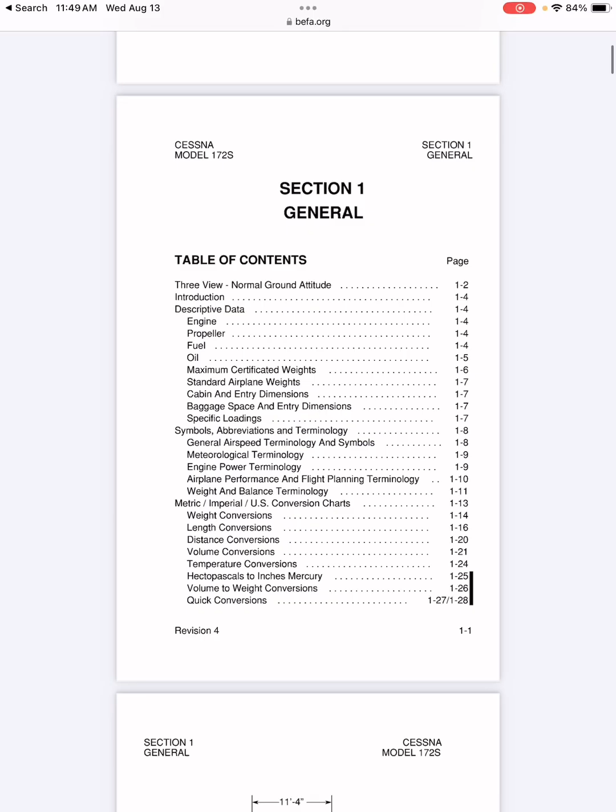All right, so what I have here is the Pilot Information Manual for the Skyhawk 172SP, or the model 172S. This is going to be a generic pilot operating handbook. It is a pilot information manual, so it is not specific to our aircraft. How do we know it's not specific to our aircraft? It does not have our tail number anywhere here. When we're flying around with the pilot operating handbook, we have to make sure that our tail number is specific to that handbook itself, and we don't just have this generic pilot information manual.

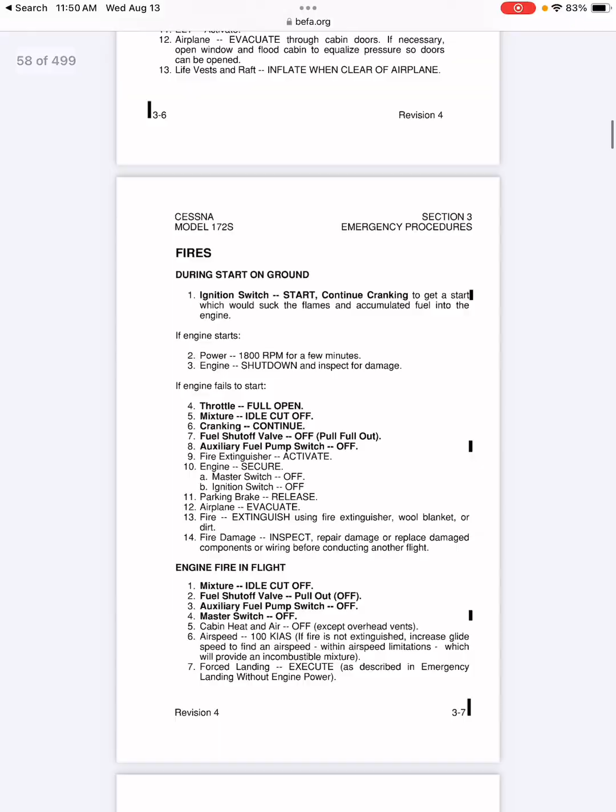So we just finished up on performance and what is pressure altitude, what is density altitude, and how that affects your performance. This is all in reference to Chapter 5 of this pilot information manual. So I'll go ahead, we'll go down through here, just shooting through the limitations, emergency procedures, checklists.

This is just the lifeblood of the 172S. But again, it has to be specific to your aircraft, so make sure that you're flying around with the actual pilot operating handbook, not this generic one.

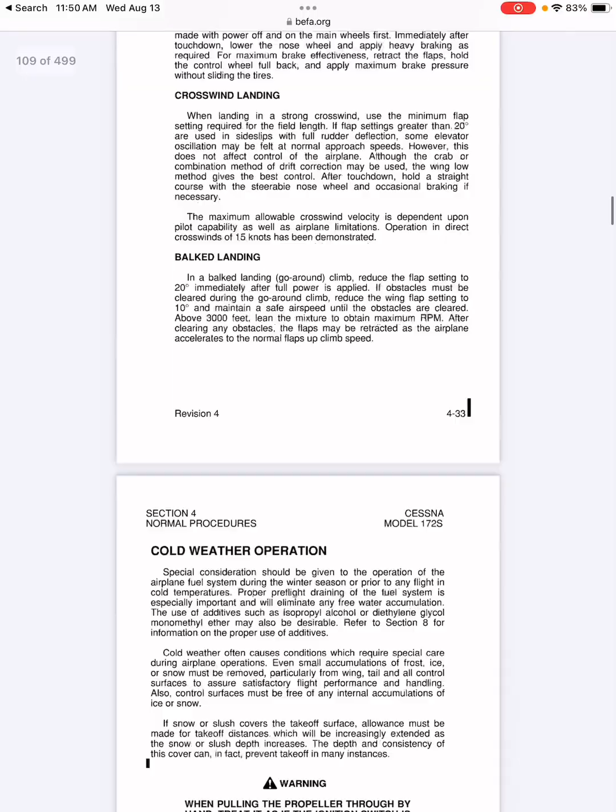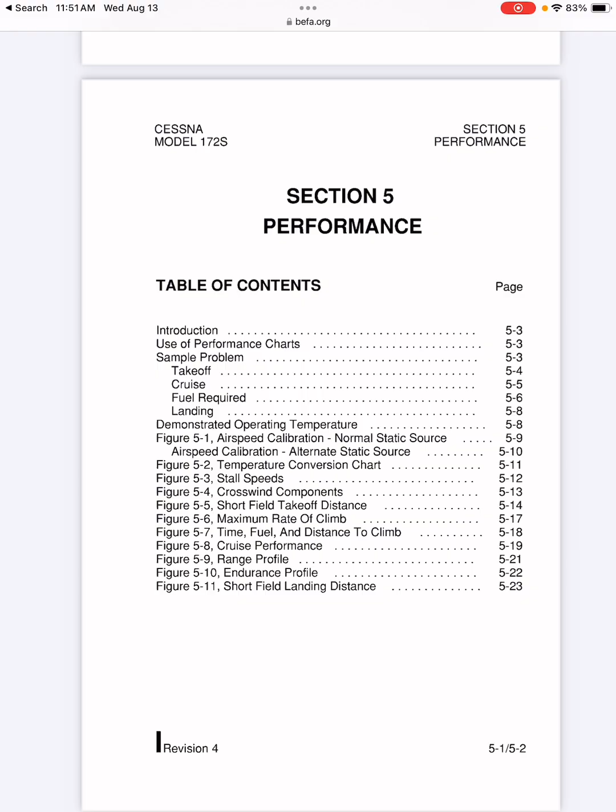So Section 5, performance. We're going to have an introduction, the use of performance charts, and they'll give us sample problems. When we come down here, we'll talk about airspeed, the difference between indicated airspeed and calibrated airspeed, how using the alternate static source affects that, and all that stuff. Then we're going to go into stall speeds and different configurations, crosswind components. But the main thing we want to talk about here is the short field takeoff distance, maximum rate of climb, time, fuel, and distance to climb, cruise performance, range profile, endurance profile, and short field landing distance.

So this is basically like a simulated flight. To start the flight, we have to go ahead and take off. We're going to use a short field takeoff technique per the pilot information manual, which is going to be a different V speed, or a different speed we actually rotate out and climb out at. It's just kind of a max performance takeoff.

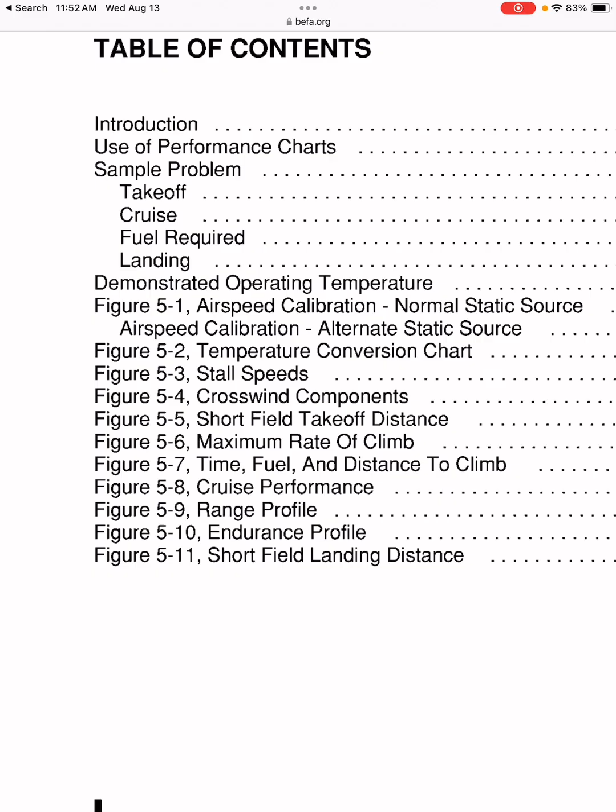And then we're going to have to climb. What kind of climb speed are we actually going to get, or climb performance, based on different pressure or different temperature for a given day? What is going to be our time, fuel, and distance to climb? What's going to be our cruise performance? How fast are we going to go? Our range profile, what kind of fuel we're going to burn, all that stuff. And then the ground roll, short field landing distance. After we clear that 50-foot obstacle, how much runway are we actually going to chew up?

So go ahead and go down. We'll just pass the introduction and the performance chart, or the sample problems and whatnot. We'll start at airspeed calibration.

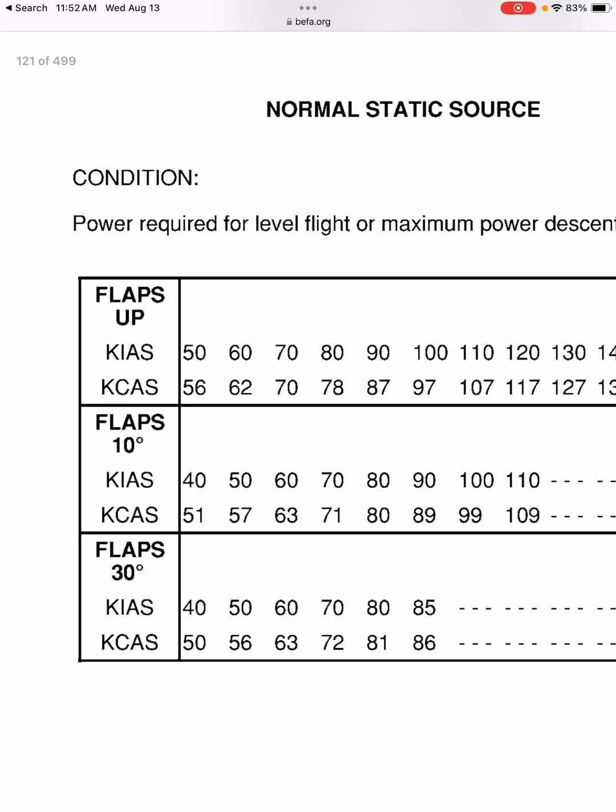This is what I was talking about when we were going over airspeeds just a second ago. So we'll have an indicated airspeed. We have a flaps up setting. Indicated airspeed is going to be 50 knots, but because of instrument error, position error with that pitot tube, it's actually going to be 56 knots. So kind of a little bit of a nice buffer for you. As we go up in airspeed, though, it kind of trades out. At 90 knots, we're actually flying 87. But at these slow airspeeds, it actually gives you a little bit of a buffer.

If we go to flaps 10, if we're at 40 knots, that is our VSO, our stall speed in a landing configuration, we're actually flying 51 knots. So just some things we got to be aware of.

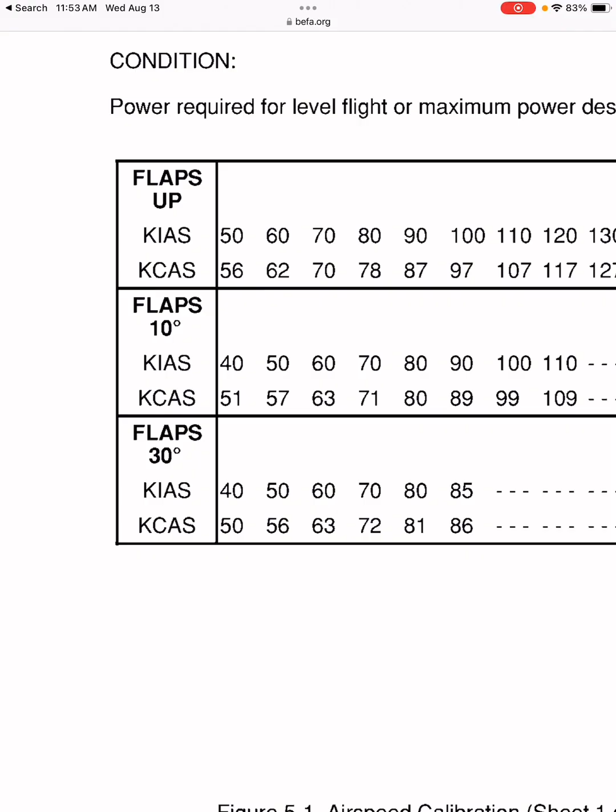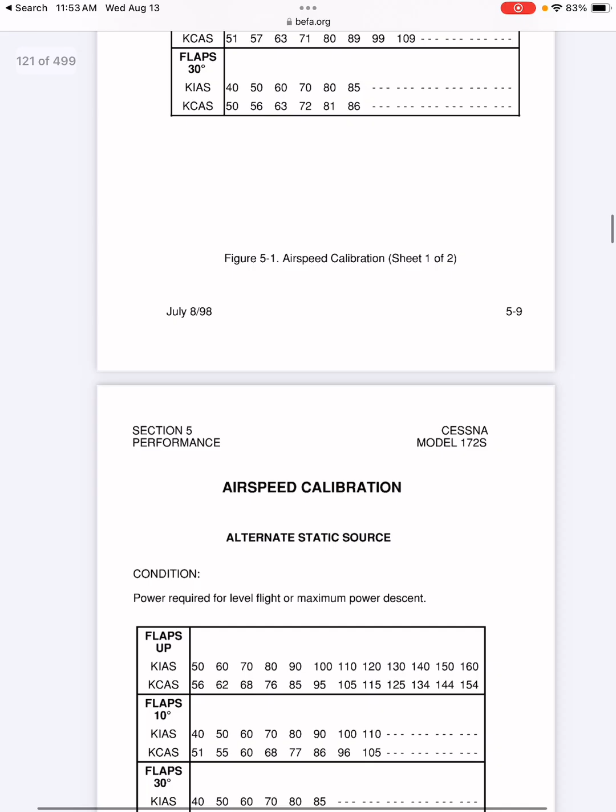This is going to be the conversion chart, and we'll use that when we're doing navigational flight planning. We'll go from indicated airspeed to calibrated airspeed. Just some alternate static source, temperature conversion chart if you ever want to go from Fahrenheit to Celsius.

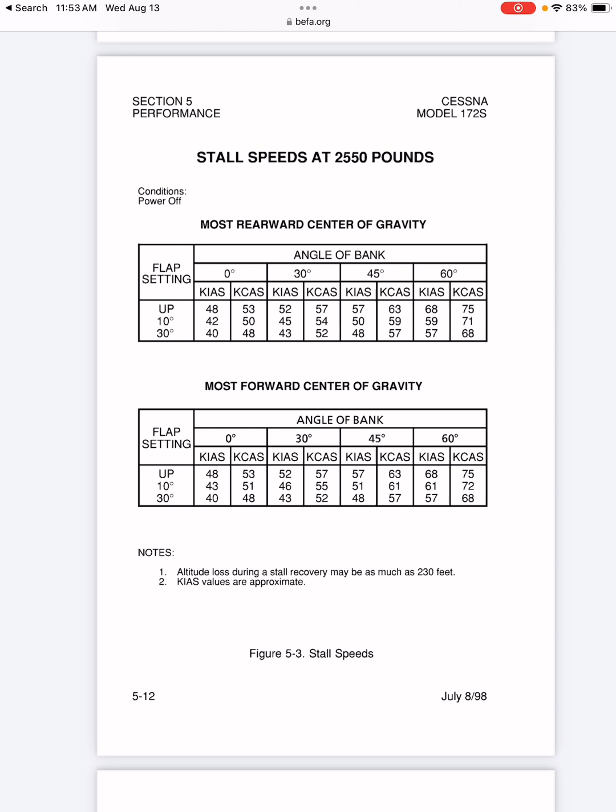Stall speeds with different centers of gravity. We'll go over that when we jump into weight and balance. How we distribute weight inside of the aircraft is going to affect our stall speed and performance characteristics as well.

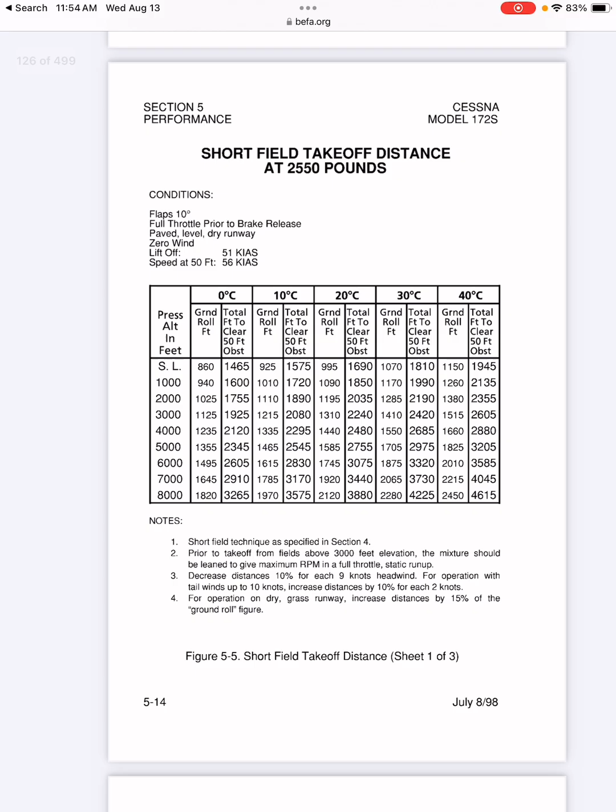Now we have the short field takeoff distance at 2,550 pounds, which is the max gross weight for the aircraft. Now we have a few different charts for our takeoff, where we're starting our flight. This takeoff here, we have a short field takeoff distance at 2,400 pounds, and we have a short field takeoff distance at 2,200 pounds. Obviously, being at max gross weight, we're going to chew up more runway.

So this is the chart for us to use if we want to be conservative, because these charts were made with a test pilot and a brand new aircraft. We have to understand that our aircraft coming from the 90s has got some wear on it. It doesn't perform like it first did right out of the factory, and we're also not professional pilots, so we kind of have to put a buffer in there. So we'll use the short field takeoff distance at 2,550. We'll be chewing up more runway, and it's just kind of a conservative factor.

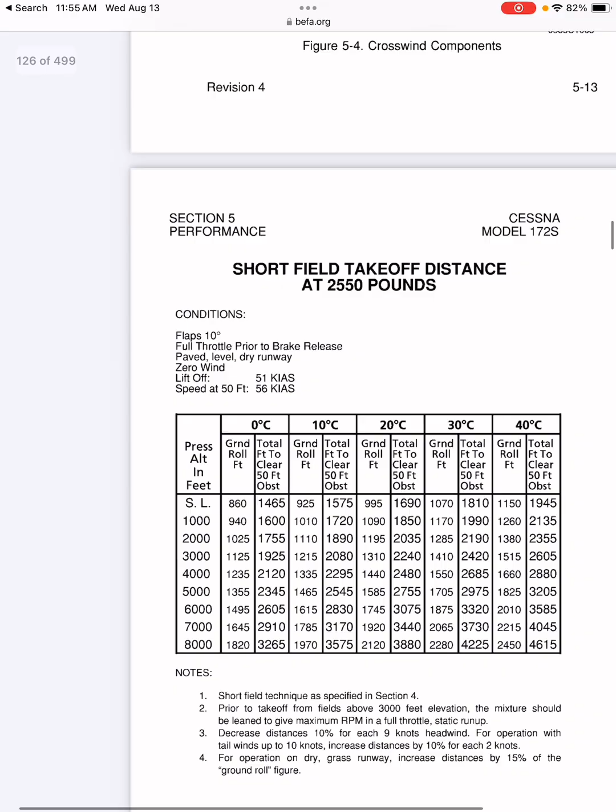Whenever we're using these charts, we want to be extra conservative, just because it's not a brand new aircraft anymore, and we're not a professional pilot. That's where these numbers were derived from. So whenever we're using these charts here, we have to go over two things first: the conditions, which is going to be on the top up here, and then we have to go over the notes. Those are the first two things we're going to go ahead and read before we actually use these figures.

So conditions: flaps 10 degrees. That's going to be standard for a short field takeoff. Full throttle prior to brake release, so us using the most amount of runway at 10 degrees flaps, applying the brakes, going full throttle, verifying our engine instruments are in the green, and verifying that the airspeed is actually staying at 0. And this is a paved level dry runway.

If we're using a grass strip or a dirt strip, obviously these numbers would be increased. This is in 0 wind, so if we had a headwind, these numbers would be decreased a little bit, because a headwind allows us to take off in a certain amount of ground roll, and a tailwind would do the vice versa of that, so it would decrease our performance, and we chew up more runway before we actually got to a good liftoff speed.

Liftoff speed is going to be 51 knots, so a little bit lower than our regular VR, our rotation speed. And then speed at 50 feet, or climb out speed, is going to be 56 knots until we climb that obstacle. One thing that people don't really understand is these liftoff speeds and these climb out speeds are going to change with weight.

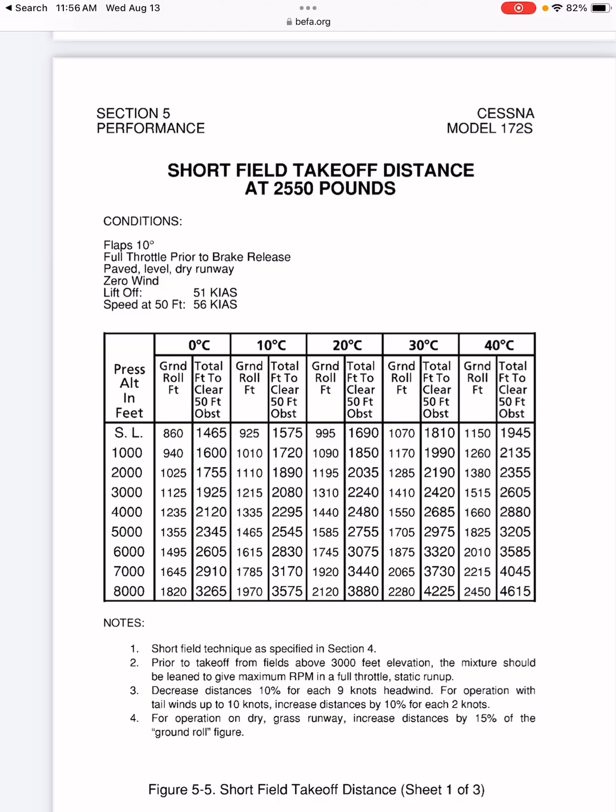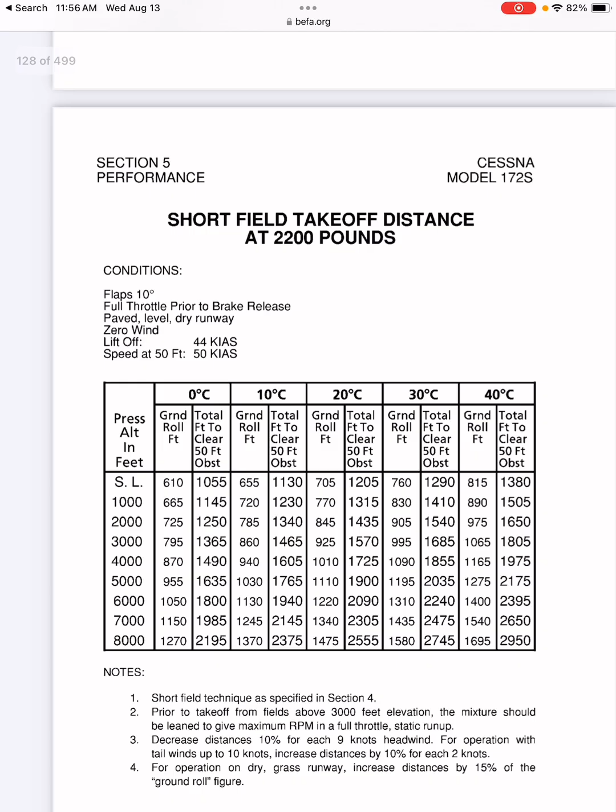So if we go down to 2,400 pounds, we have a liftoff speed of 48 and a climb out speed of 54. And then we have at 2,200 pounds, a liftoff speed of 44 and a climb out of 50. So it kind of changes with weight. But if we want to be extra conservative, we're going to use the 2550, which is pretty standard. But just know, for your check ride sake, that it does actually change with weight. So liftoff 51, climb out 56.

Now let's read those notes, because like a good pilot, we read the conditions first, then we go to the notes. Short field techniques as specified in section 4, so just standard short field takeoff techniques. Prior to takeoff from fields above 3,000 feet elevation, the mixture should be lean to give maximum RPM, so above 3,000, we're going to lean it out for best RPM.

Decrease distances 10% for each 9 knots of headwind. For operations with tailwinds up to 10 knots, increase distances by 10% for each 2 knots. So we have to go ahead and change the numbers that we get for each 9 knots of headwind, 10%. So we have to decrease it. Like we said, it's going to decrease our ground roll if we had that headwind. It's letting us know that.

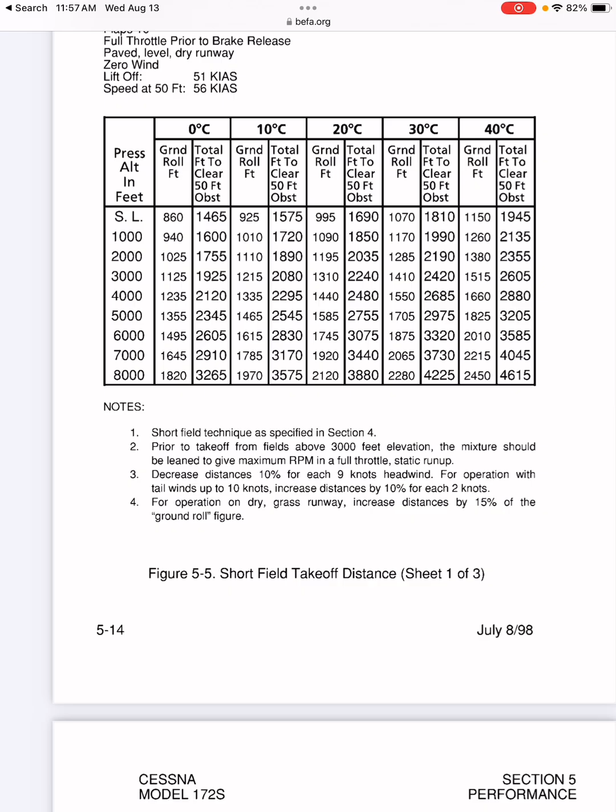And then for operations with tailwinds up to 10 knots, increase those distances by 10% for each 2 knots. So if you had a 4-knot tailwind, you'd have to increase these numbers by 20%, which is going to be quite a bit. And then for operations on dry grass runways, increase distances by 15% of the ground roll figure, which is huge. So of a dirt or grass runway, we know the conditions for this is a paved level dry runway. We have to go ahead and increase it by 15%. So the ground roll is going to be pretty big.

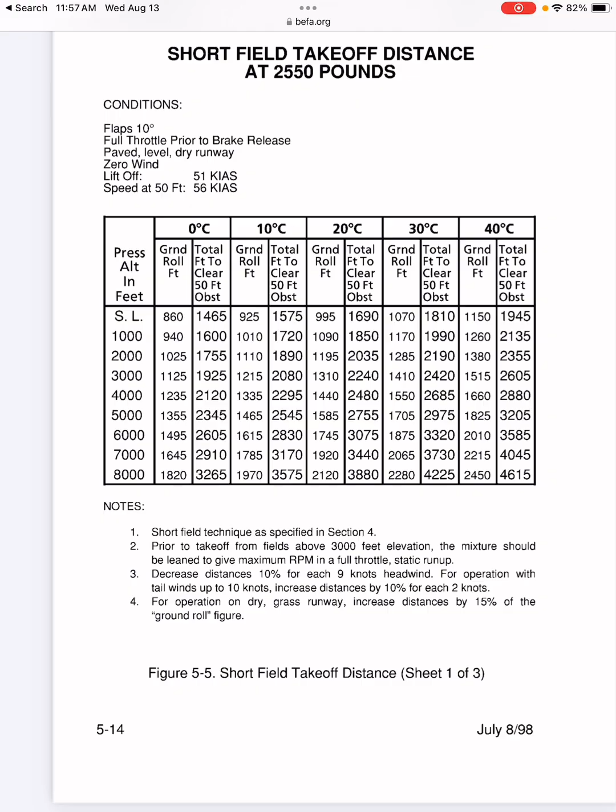Cool. Now we can go ahead and jump into the chart itself. Like I said, when we were calculating that pressure altitude, we were doing that for a reason. We have sea level here. We have 1,000 feet. We have 2,000 feet. The last calculation that we did for a pressure altitude, with the altimeter setting being 30.02, was 900 feet. But if we want to be conservative, let's just round up a little bit, and we'll call it 1,000 feet.

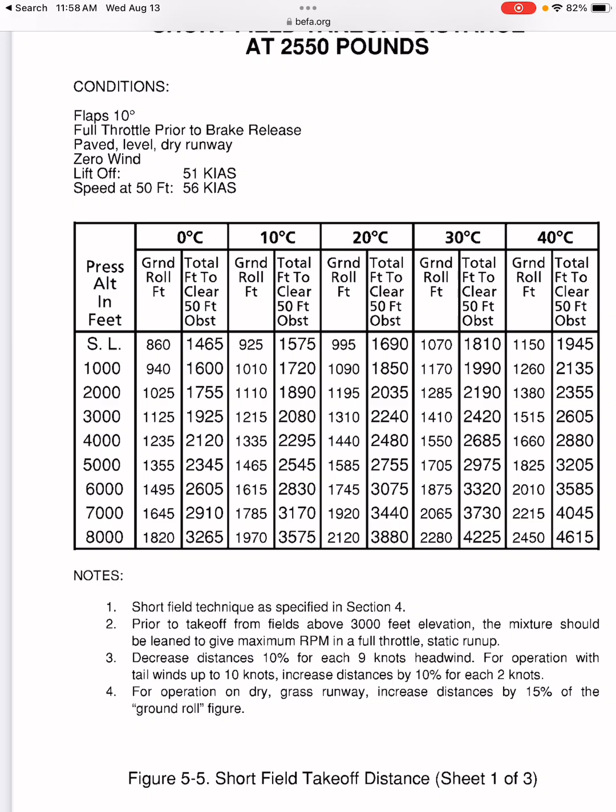Now, temperature. We said that Phoenix was going to be 105 degrees Fahrenheit for the day, which is going to be this 40 degrees Celsius column all the way out this other side. So we're correcting for pressure in this left column, and in the top row, we're correcting for temperature. So pressure on the left column and temperature on the top column. And we're just going to kind of line them up.

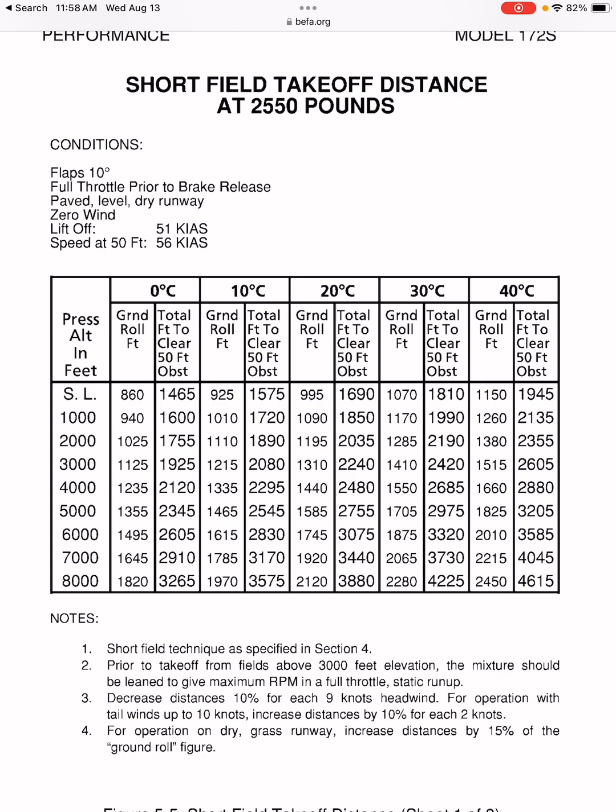So at 1,000 feet, we have two figures here: ground roll, which is the actual runway we're going to chew up, and total feet to clear a 50-foot obstacle. This is the horizontal distance it takes for us to climb up at 56 knots.

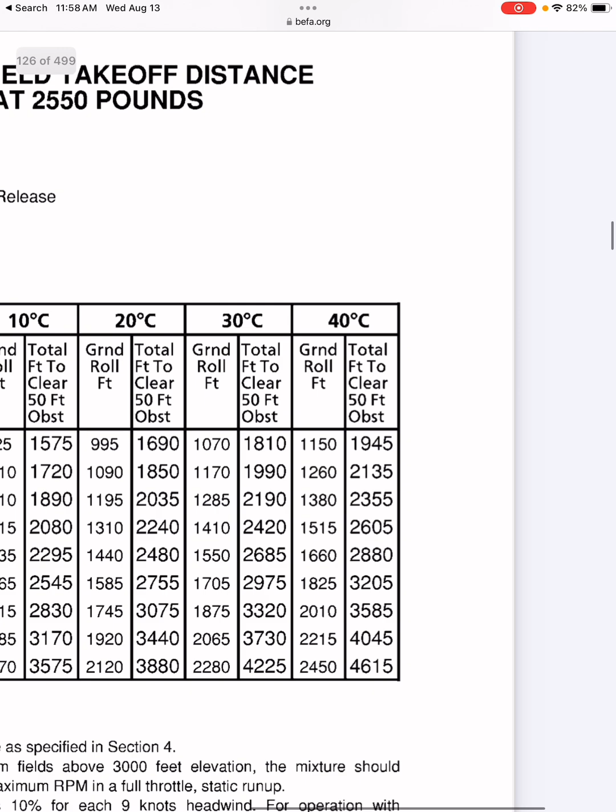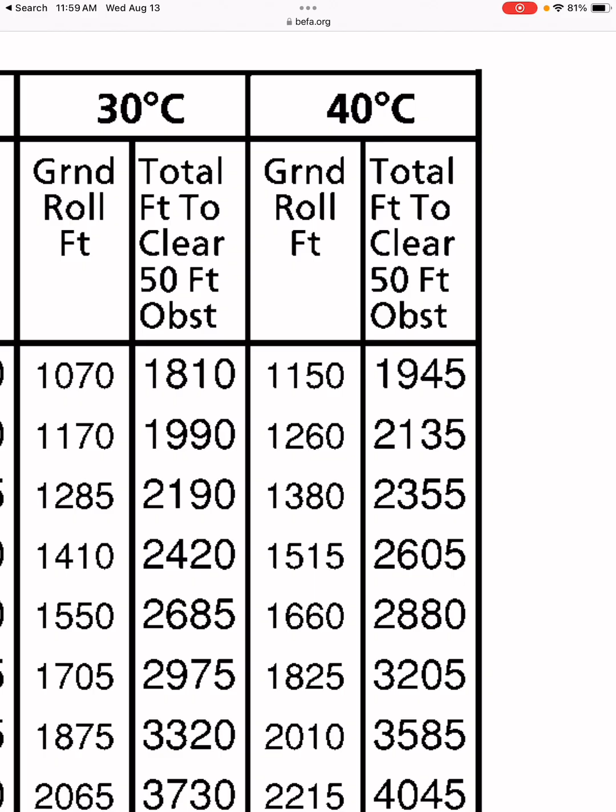But we have to go to the 40 degrees Celsius column, so we'll go all the way over here. Now we can calculate, just making sure we're using the right one. At 1,000-foot pressure altitude and 40 degrees Celsius, we're going to have a ground roll of 1,260 feet. And to clear that 50-foot obstacle, we'll need a horizontal distance of 2,135 feet. That's basically how we use the short field takeoff performance charts.

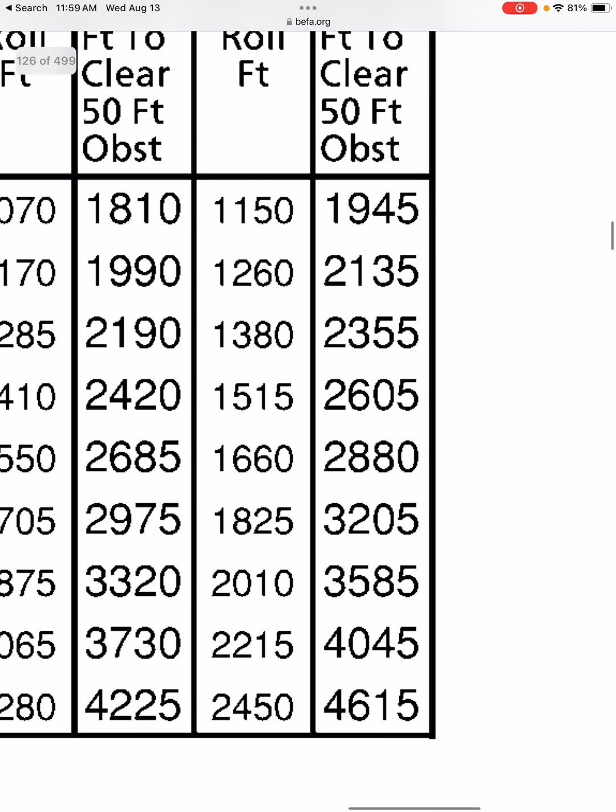As our pressure altitude goes up, say if we were taking off at an airport at 8,000 feet, like Flagstaff which I believe is pretty high up there, and we went all the way to the hottest day it could be, we're going to use pretty much double. So 2,450 feet is going to be our ground roll to get to that rotation speed.

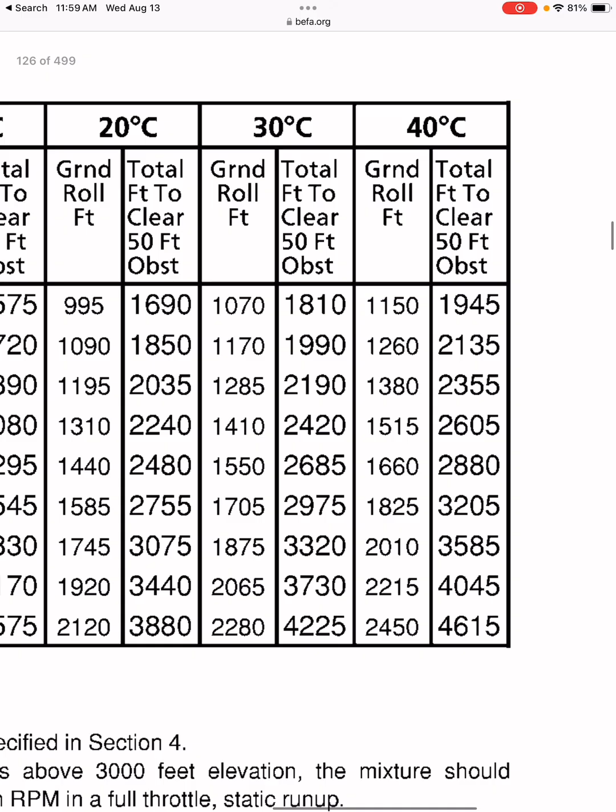And to clear that 50-foot obstacle, we're going to need 4,600 feet. So if we have a tree 4,000 feet down the runway that's 50 feet tall, we're probably not going to make it. This is why it's so important to understand your runway length of intended use, because this is going to save your life. It really is. So this is takeoff using a short field takeoff technique.

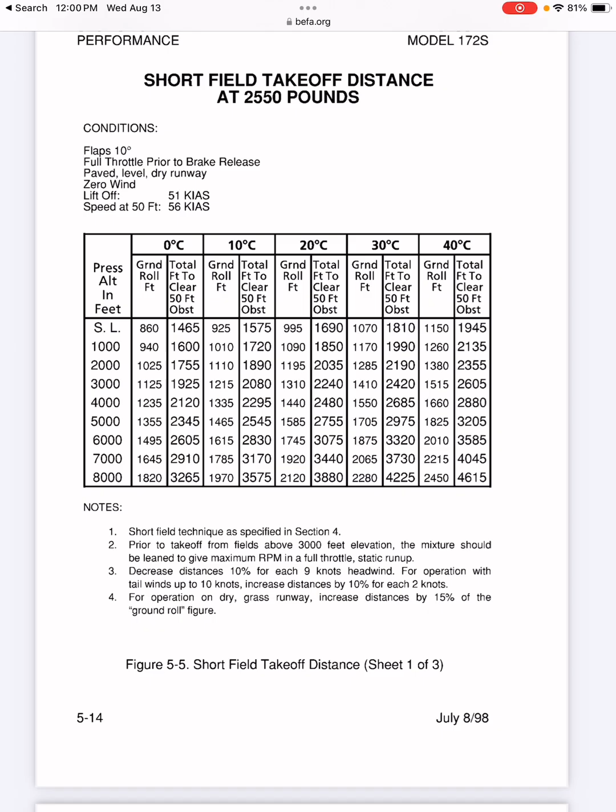And then we have the different weights as well. Like I said, be conservative. This was done by a test pilot in a brand new aircraft, so use the highest gross weights, round up your numbers. If it's warmer, or if that pressure altitude's a little higher, use that higher number to give yourself a safety buffer, because this is no longer a new aircraft.

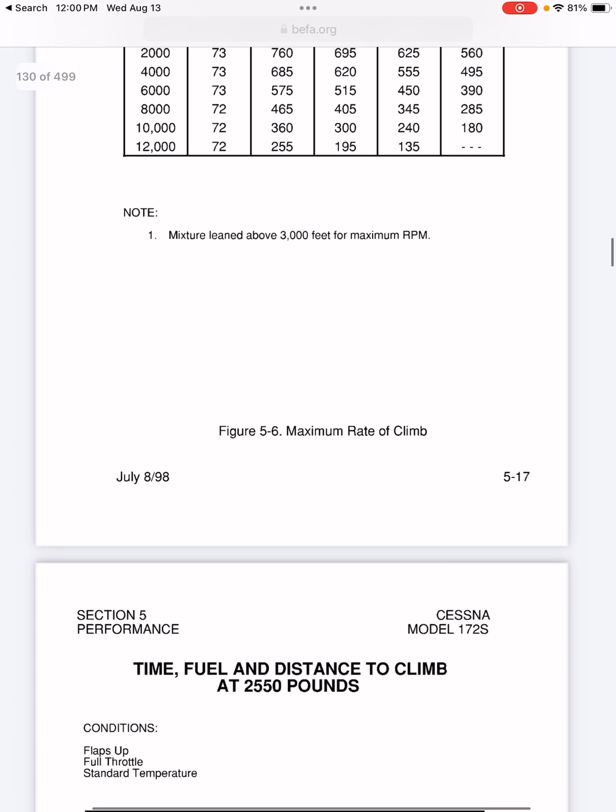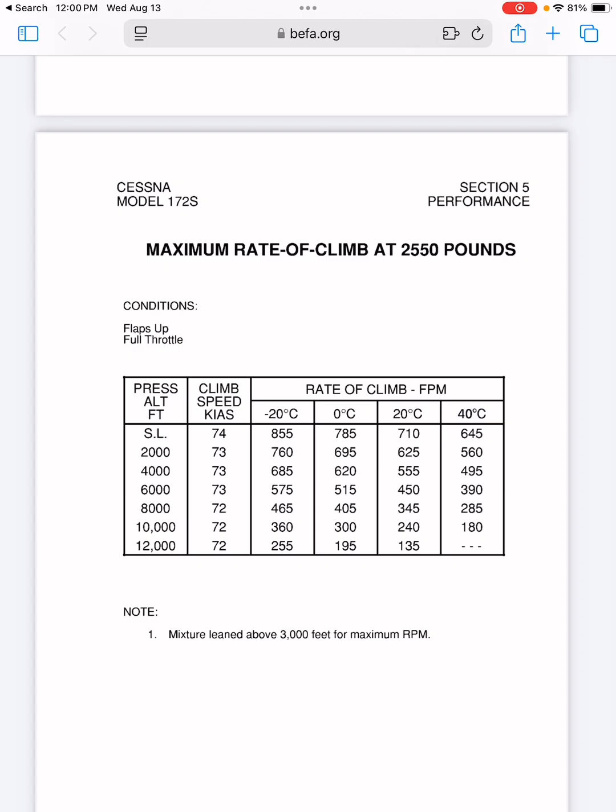Now we have to climb. This is going to be maximum rate of climb at 2,550, max gross weight. They don't have another one that varies with the weight we actually are—it's just max gross weight 2,550. Conditions: flaps up and full throttle. If we were using that short field takeoff technique, we would not be getting this climb performance because we were flaps 10. This is also full throttle, so we've got to be at full throttle to get these actual figures.

Notes: mixture leaned above 3,000 feet for maximum RPM. We'll talk about correct leaning procedures when we're actually flying around. It's laid out kind of like the short field landing technique was: pressure altitude is the left column, and on the top column we're correcting for temperature. We know density altitude is pressure altitude corrected for temperature, and these are the figures we get.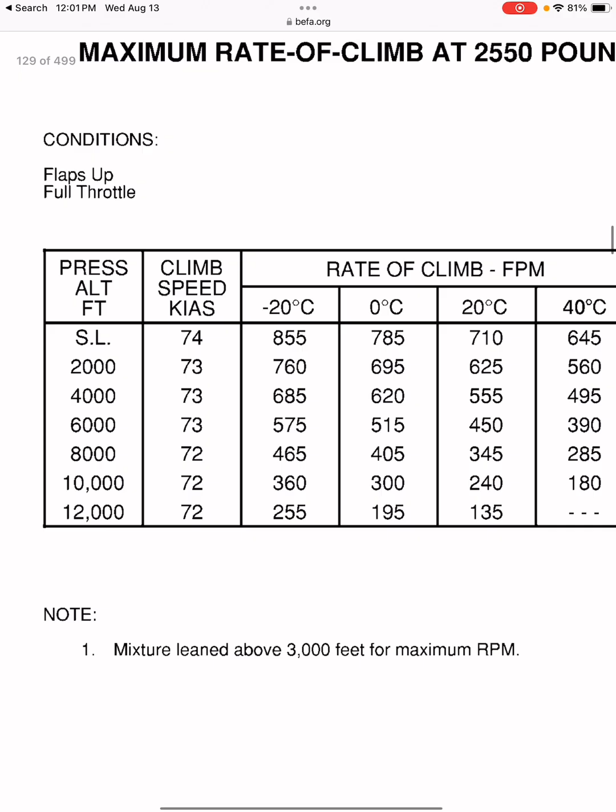So let's say we're taking off at a pressure altitude of 1,000 feet like we were—you notice we don't have that figure, so we have to interpolate to get the actual number. If we go from sea level to 2,000 feet at the temperature of 40 degrees Celsius, we have 560 and 645. At sea level, climbing out at 74 knots, we get 645 feet per minute on the VSI, and at 2,000 feet it'd be 560 feet per minute. We have to find the average since we're actually taking off at a pressure altitude of 1,000, so 645 plus 560 will put us around 600 feet per minute.

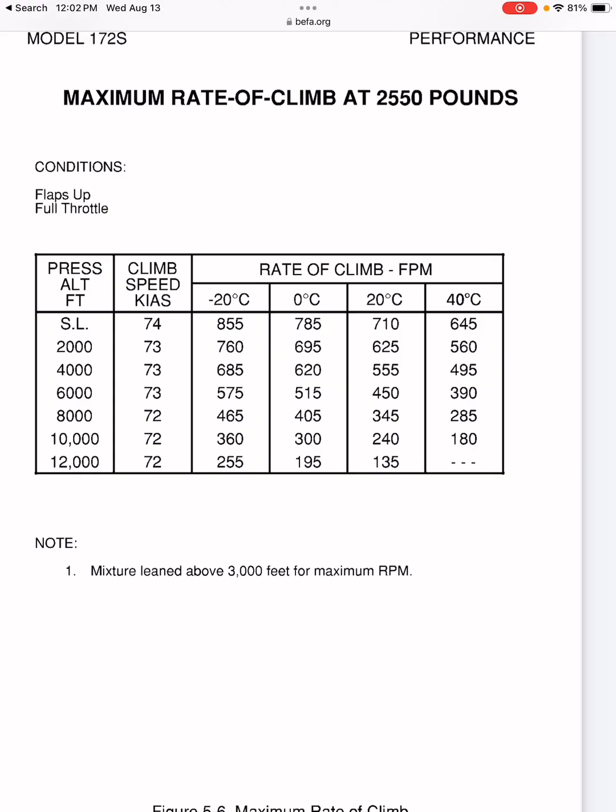As we climb up through 4,000, 6,000, 8,000 feet, we see it starts to drop because there's less dense air—less air for engine thrust or power, less air for propeller thrust, and less lift over the wings. You can see at 4,000 feet, at 40 degrees Celsius, it's 495, then it drops to 390, 285, 180, until we get to a service ceiling where we actually can't climb anymore. Good note there. Next one: time, fuel, and distance to climb.

How much fuel we're actually going to use, how much time it's going to take us to get to our desired altitude, and how much distance we're going to chew up. This will be very important when we go into navigational flight planning, when we're going over a nav log or top of climb. We need to know how far that top of climb in horizontal distance is actually going to take us, and this is the chart we can use for that.

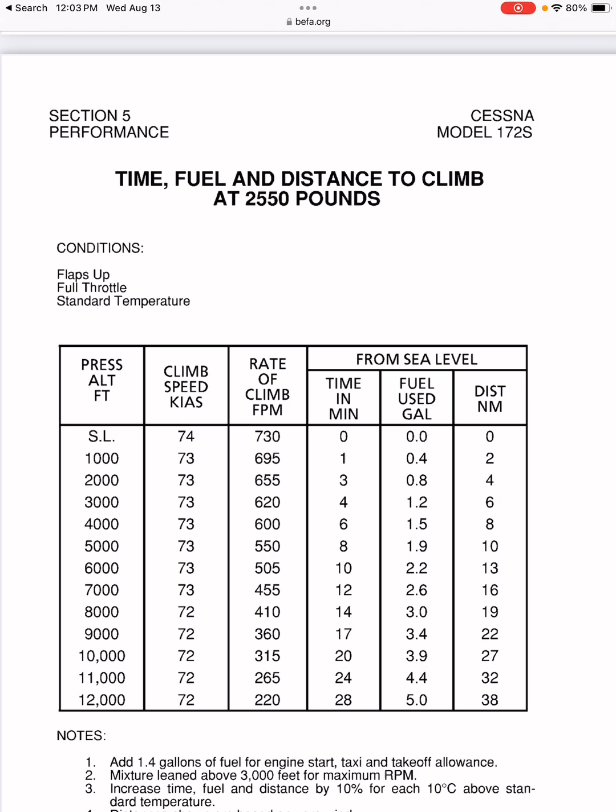So we'll start at the pressure altitude here, 1,000 feet, and then a climb speed of 73. Rate of climb is going to be... I committed—

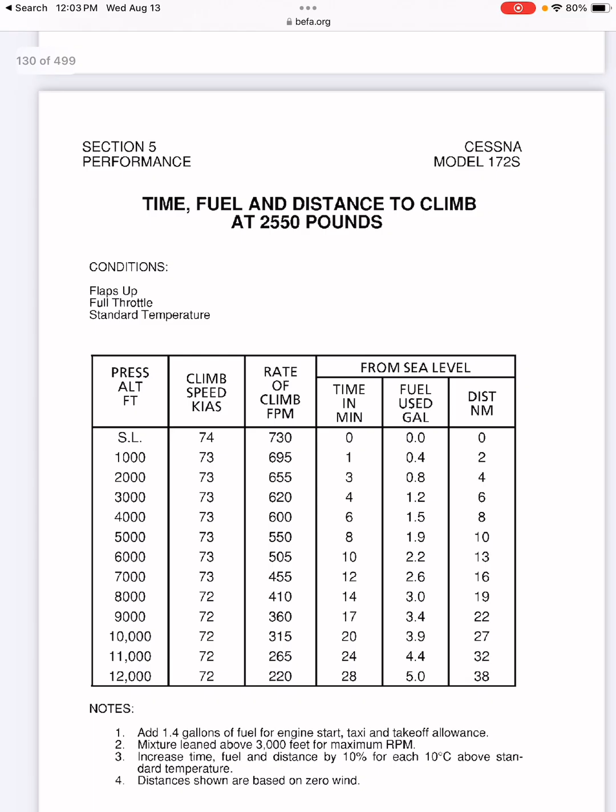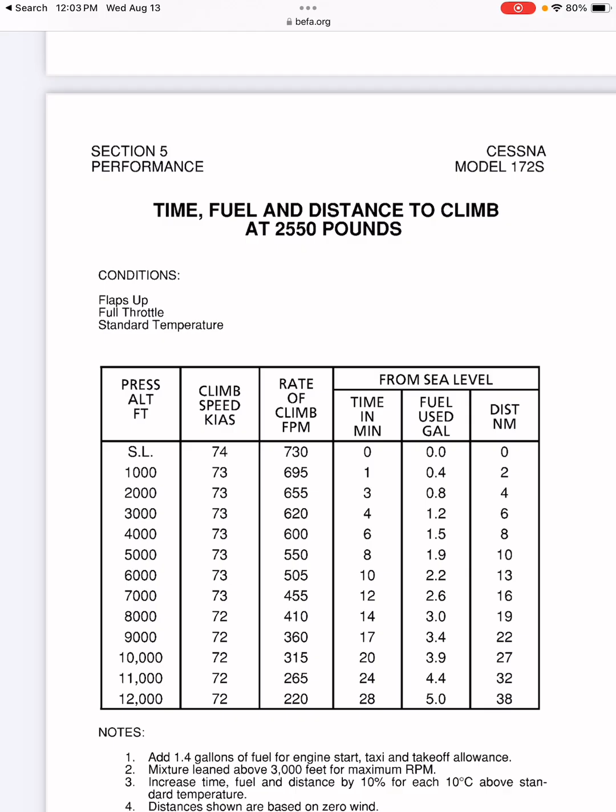I forgot to read the conditions first. So conditions: flaps up, full throttle, and standard temperature. That's why if I just use that chart, this is a great example of using the charts incorrectly—I just started reading it.

We have to know that these figures are in standard temperature conditions. So if we go to the notes, it's probably going to have some information on that: add 1.4 gallons of fuel for engine start, taxi, and takeoff allowance. Mixture leaned above 3,000 for maximum RPM. Increase time, fuel, and distance by 10% for each 10 degrees Celsius above standard temperature.

So when we were taking off in 40 degrees Celsius at that pressure altitude of 1,000, and we know standard temperature for that was actually 13 degrees Celsius, each 10 degrees Celsius above standard is almost going to be 30 degrees above. So we'd have to increase these numbers—time, fuel, and distance—by 30%, because we're almost 30 degrees above standard temperature. So just be aware of that.

Distances are shown based on zero wind as well, so if we had a headwind, it would decrease that distance. Obviously, if we had a tailwind, it would push us out further. Also, with a headwind we get a better climb rate and whatnot. But yeah, so we read the conditions, we read the notes.

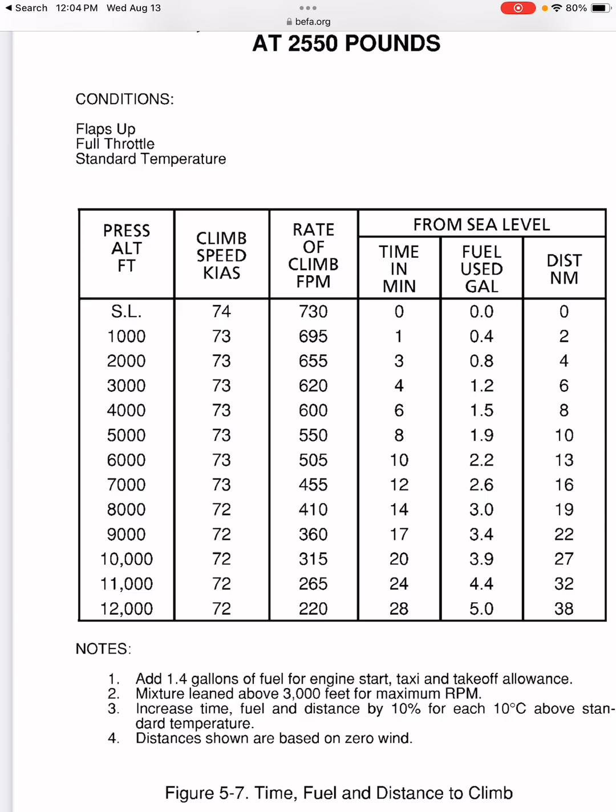Now we can go ahead and jump into this. So pressure altitude of 1,000 feet, we'll start with that left column there, climbing out at 73. Rate of climb is going to be 695 feet per minute. Time is going to be 1 minute. Fuel use 0.4, distance 2 nautical miles.

What does all that mean? Well, that's telling us if we were flying from sea level to 1,000 feet, we would get a climb rate of 695, and it would take us 1 minute. We would use less than half a gallon of fuel, and it would take us 2 nautical miles to get from sea level to 1,000 feet.

But we're flying from sea level and we want to go to a cruise altitude of, let's say, 6,500 feet. So what we're going to do is start out at that 1,000 feet—we have those figures there—then we're going to go to 6,500 in the pressure altitude. Look at that, we don't have 6,500. So we can just round up to be a little more conservative and use the 7,000 figure. We could interpolate, using the averages between those numbers.

That's a lot of math, a lot of time, and it's just going to be marginal. So we'll just use the higher figure to be more conservative. So it's 7,000 feet, 73 knot climb speed, rate of climb is going to be 455. We could actually get the climb rate from 1,000 up to that pressure altitude of 7,000—we could average those out and get our climb rate along the way. We could do that.

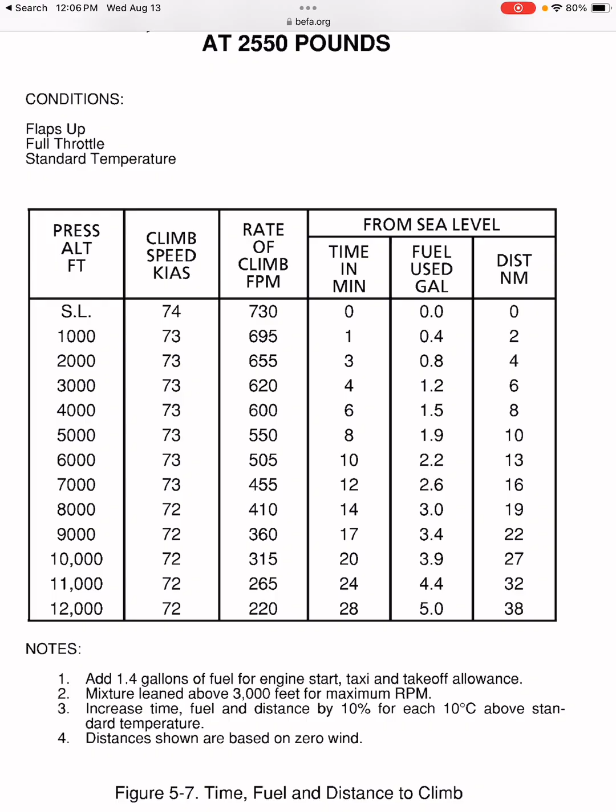But once we go over to time in minutes, we'll go from 12 minutes from sea level. We're not flying from sea level, we're flying from 1,000 feet pressure altitude. So what we're going to have to do is go 12 minus the 1, and that means it's going to take us 11 minutes to get from 1,000 feet pressure altitude all the way up to a cruise altitude of 6,500. We're using 7,000 to be conservative.

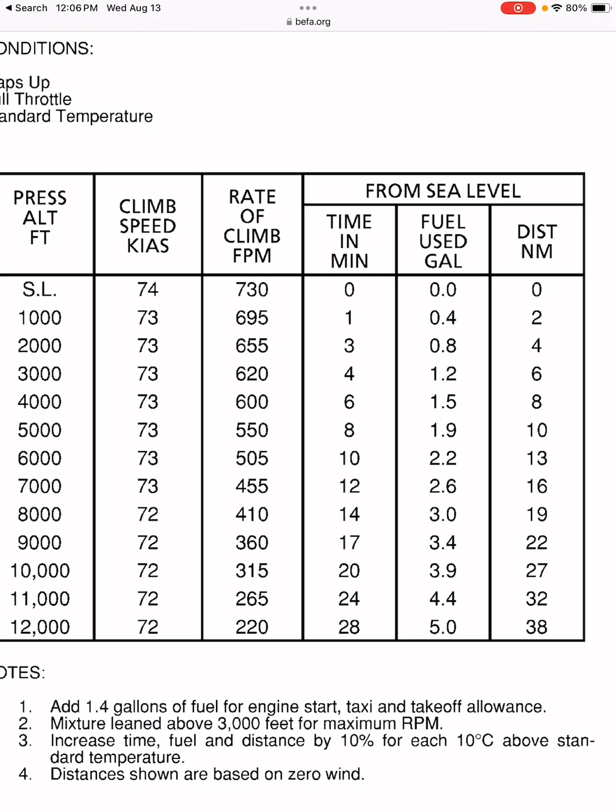Now, if we go to 2.6, we have to use 2.6 minus the 0.4, so it's actually going to take us 2.2 gallons to get from 1,000 to 7,000. And now we have our distance in nautical miles—so how long is it actually, horizontal distance? How far is it going to take for us to actually get to 7,000 from 1,000?

We go 16 minus 2, so it's going to be 14 nautical miles.

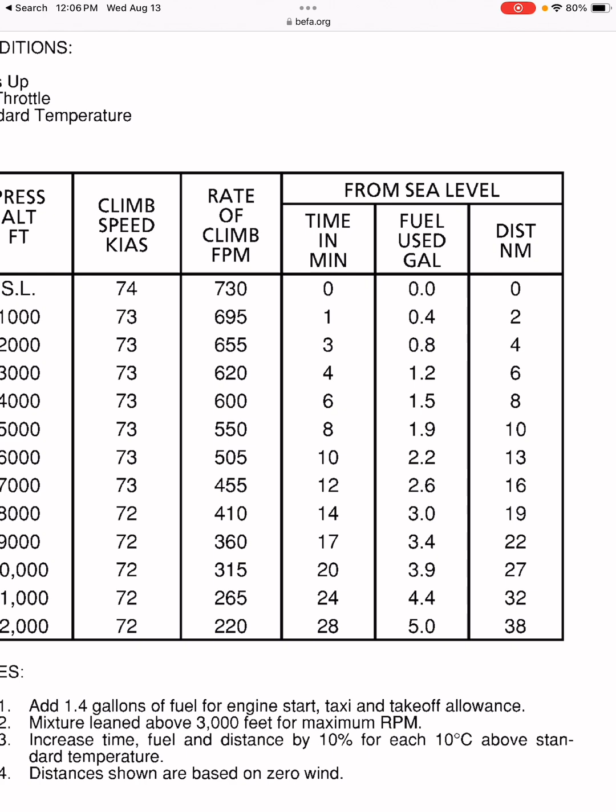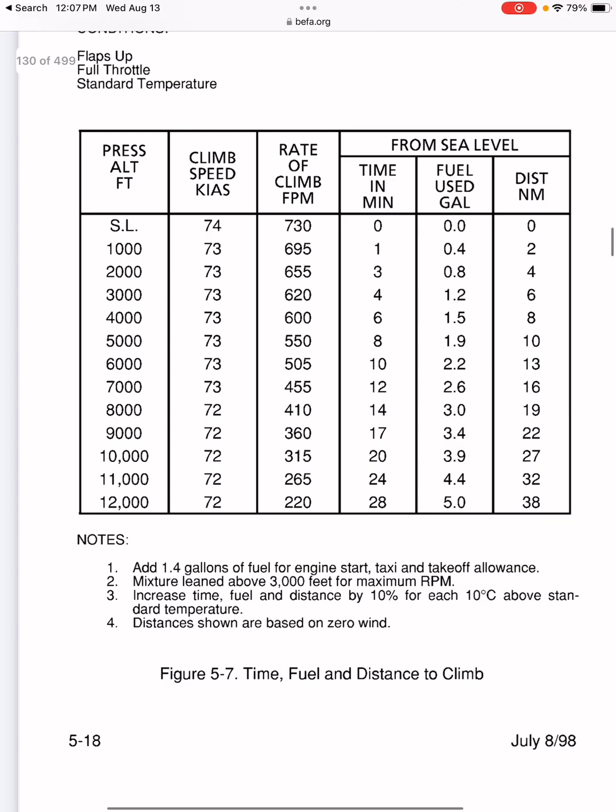Now we know we have to increase these by 30%. I don't have a calculator on me, but you would go through each figure and multiply it by 1.3. You take that 12 minus a 1, 11 times 1.3, 2.6 minus 0.4 times 1.3, and then 16 minus the 2 times 1.3, and you get the actual figures for your time to get the altitude, the fuel that you're going to use, and then the distance in nautical miles. Just a heads up, like the notes say, this is based off of zero wind, so it can vary. But yeah, that's going to be time, fuel, and distance to climb. That's kind of how we use that chart.

And that's at 2,550 pounds max gross weight. We don't have another weight for this one.

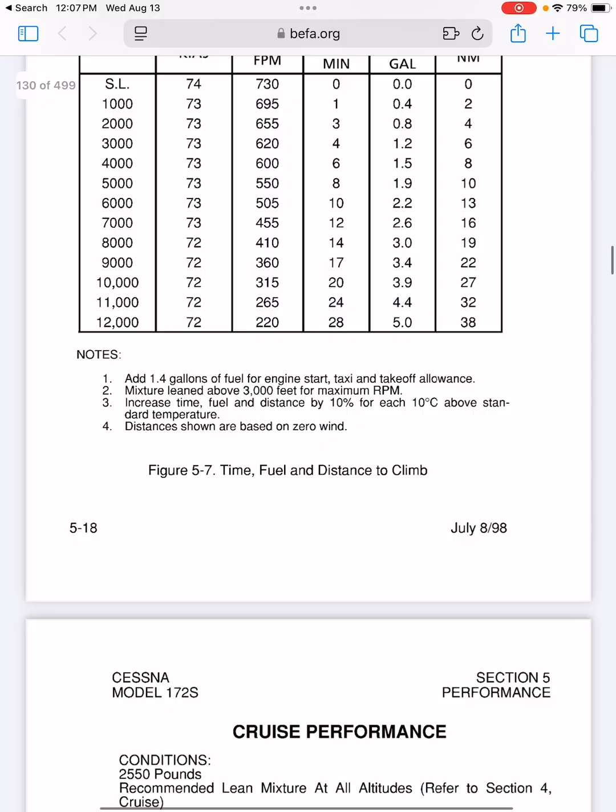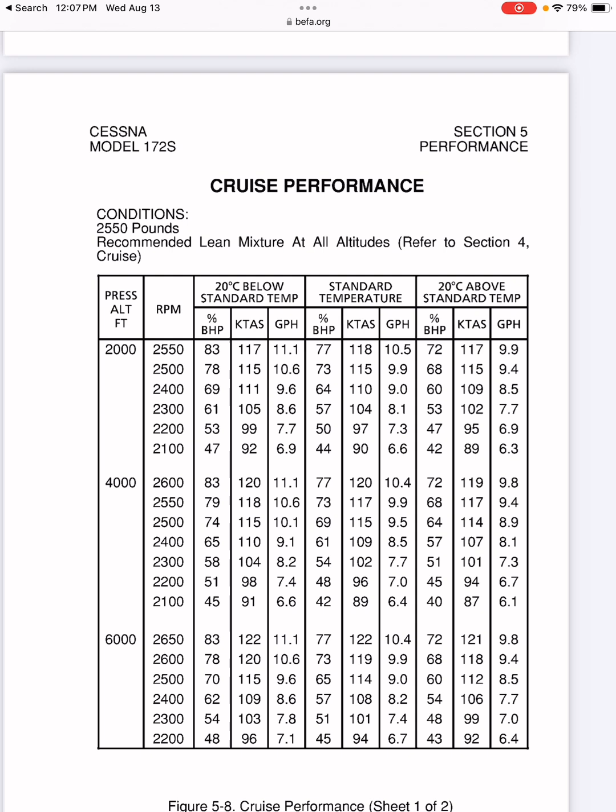All right, now we can go to, say, we got to this cruise altitude of 6,500 feet. What kind of performance are we actually going to get there? So first things first, we're going to read the conditions. 2,550 pounds, recommended lean mixture at all altitudes, so just lean the mixture for best performance.

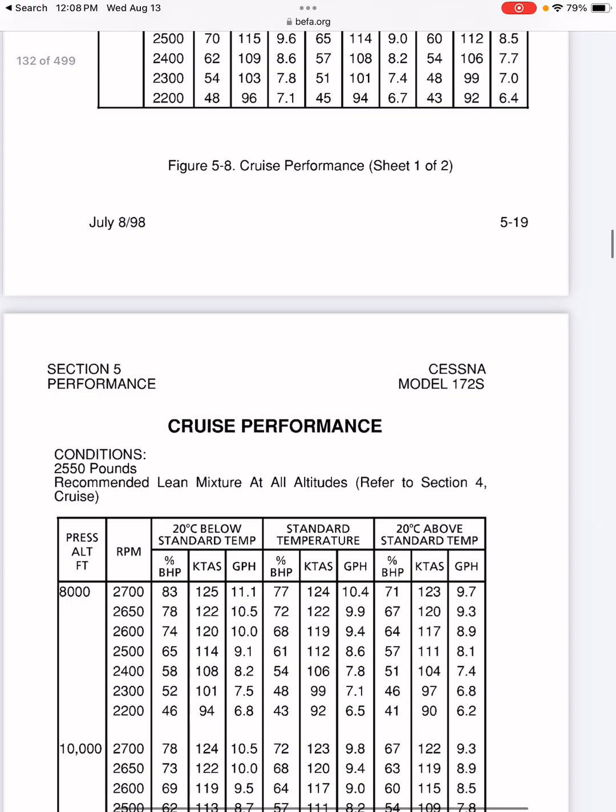And as we go down here, we get higher and higher pressure altitudes. So we can go from here. We know our pressure altitude that we wanted to fly to was 7,000 feet or 6,500, but we don't have that. We have 6,000 pressure altitude and we have 8,000 pressure altitude, so it kind of skips that for us.

Now we have to understand the notes as well. No notes for this one, unfortunately, we just have the conditions for it. But we're going to have to do some interpolation from the 6,000 to the 8,000. And we know we're 30 degrees Celsius above standard, but this says 20 degrees Celsius above standard. So we actually might be flying a little bit faster because of that less dense air as we go up in altitude.

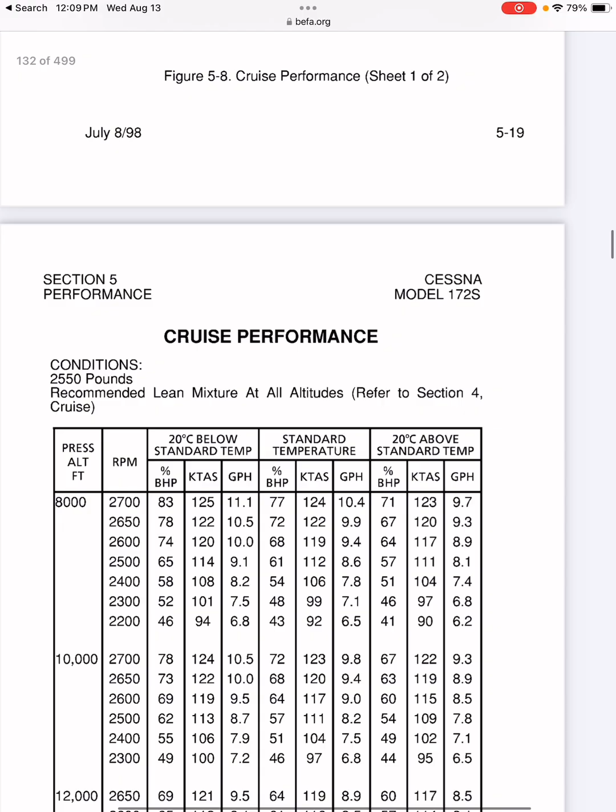And we might be using a little bit more fuel as well, or less fuel as well, because we have that better cruise performance with that less dense air.

We are rated at a little bit higher than that, but we don't want to overstress the aircraft. So we go to the right here. Let's look at the temperature. So 20 degrees Celsius below standard temperature. We're not that, but let's see what that percent brake horsepower is. Percent brake horsepower, yeah, our RPM is 2,550, and we're rated for 2,700 RPM, but we're actually only getting 83% brake horsepower, or the 83% power, as opposed to 100% power.

Kind of impossible to get 100% power with drag, the air mass itself, all that stuff. So this is just the actual percent of power you're actually going to get out of it. That's what it's showing you.

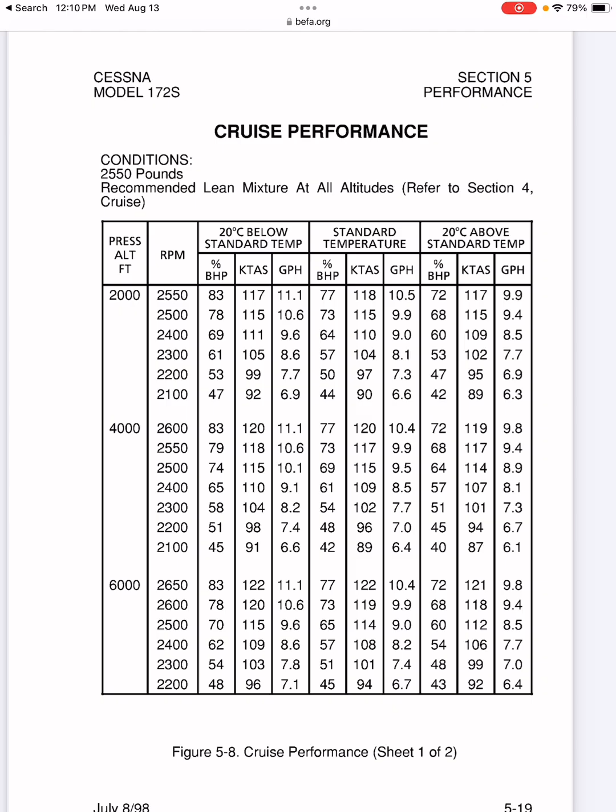We will go down to the true airspeed. So at 2,550 RPM, we'll get a true airspeed of 117, which is going to really help us out when we're trying to manage or calculate our estimated time en route. And then we have the gallons per hour, so how much fuel we're actually going to burn. So that's at a pressure altitude of 2,000.

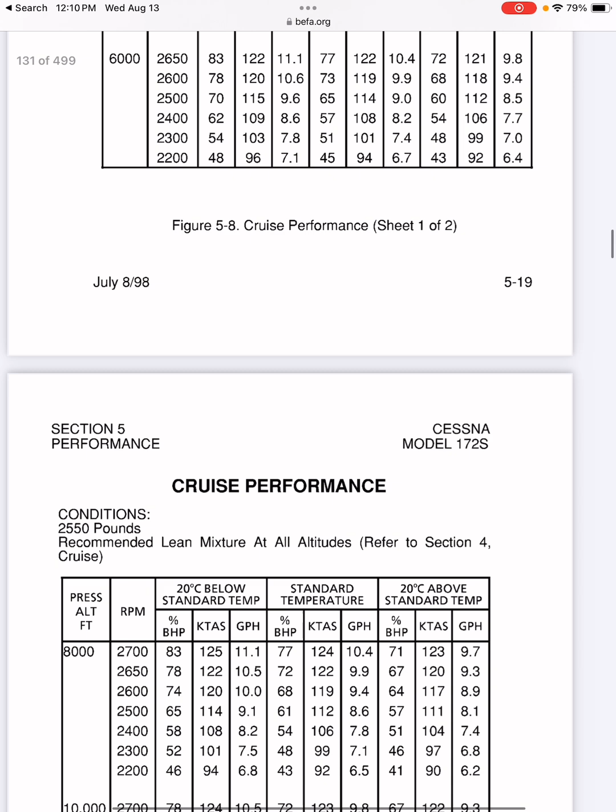We wanted to come back up to our 6,500. We can use 6,000 just for simplicity here. I could show you the math, we could interpolate between the 6,000 and the 8,000, but it's just a lot of math at the moment, so we won't do that.

So we have to pick a good RPM setting. I would say 2,500 RPM is going to be good for cross country. We don't want to be pushing above 65% brake horsepower for extended periods of time, or I believe it's 75% - I'd have to double check that. We just don't want to overstress that engine. So anything below that 75% brake horsepower is going to be a good power setting for us.

So we can go 65% brake horsepower. We'll go ahead and go 2,400 RPM for the 6,000 because that puts us at 62% brake horsepower.

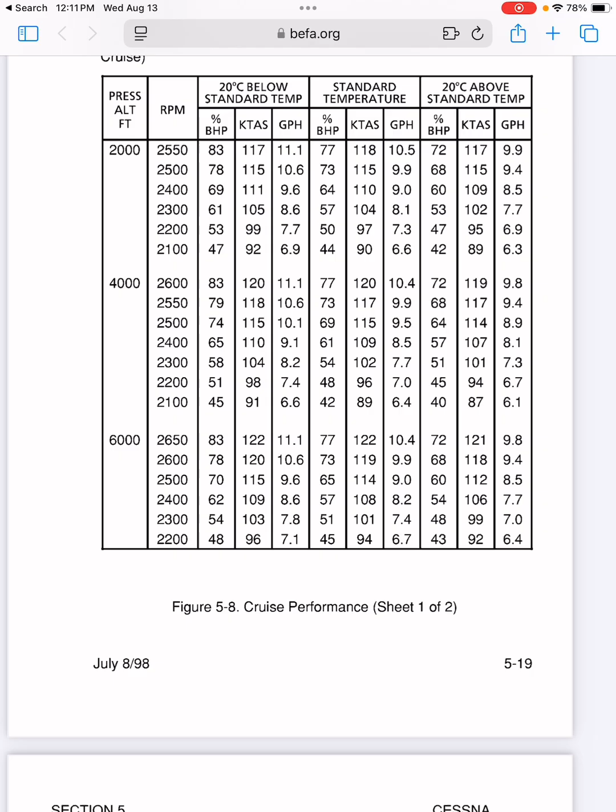It's going to give us a good cruise speed if we're 20 degrees below standard temperature of 109. And then we have gallons per hour, 8.6. But we know we're 20 degrees Celsius above standard temperature.

So if we go all the way to the rightmost column at 2,400 RPM, we will get a brake horsepower of 54%. We'll also get a true airspeed of 106, and then a gallons per hour of 7.7. We can actually bump it up to 2,500 RPM because our brake horsepower is still under that 65%. We're getting 60% brake horsepower here. True airspeed's 112, and gallons per hour is going to be 8.5. So that's going to be our fuel burn for it.

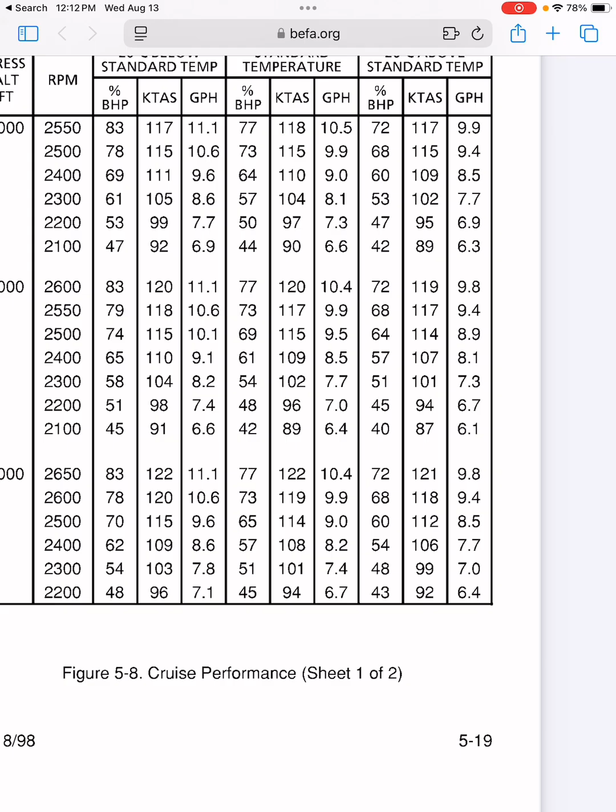Now, when we go to a navlog, we can actually calculate how long each checkpoint is going to take to get from A to B, what brake horsepower we're at, and how many gallons per hour we're actually going to burn, which is super helpful.

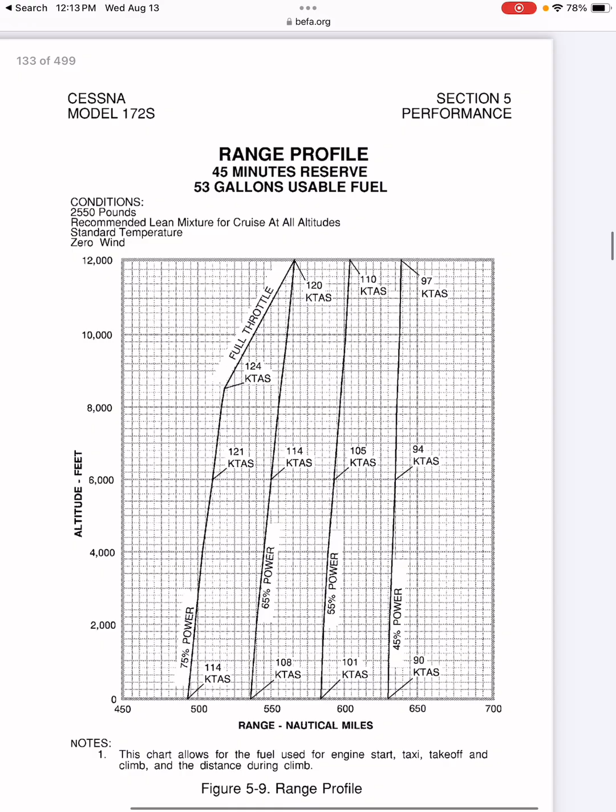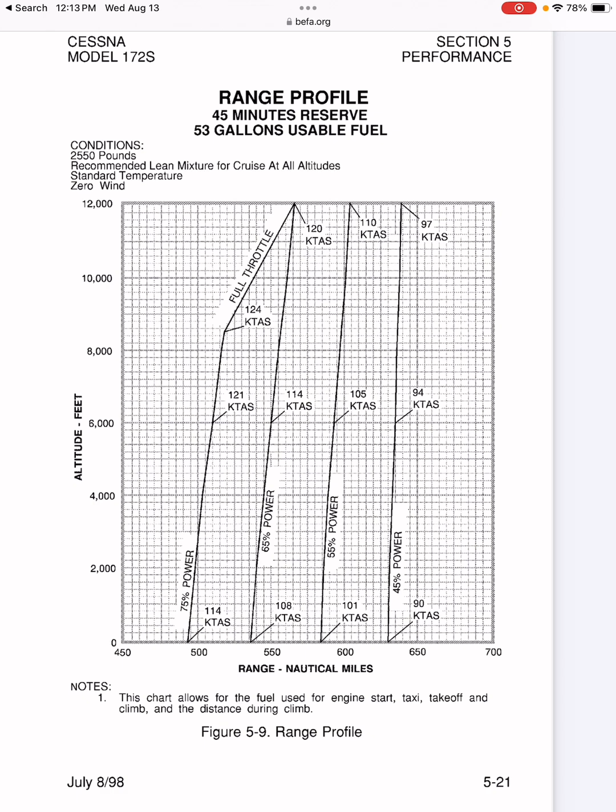Now we can come down to our range profile. This is just letting us know our range in nautical miles, how much we're going to get with the brake horsepower we actually choose. So conditions: 2,550, recommended lean mixture for cruise at all altitudes, standard temperature, and 0 wind. Notes: this chart allows for fuel use for engine start, taxi, takeoff, and climb, and the distance during climb.

So we picked 65% brake horsepower. If we go ahead and follow that line, and we're at 7,000 feet, if we go up to that line, we know our range in nautical miles. If we were full fuel, it would be about 550 nautical miles if we went down.

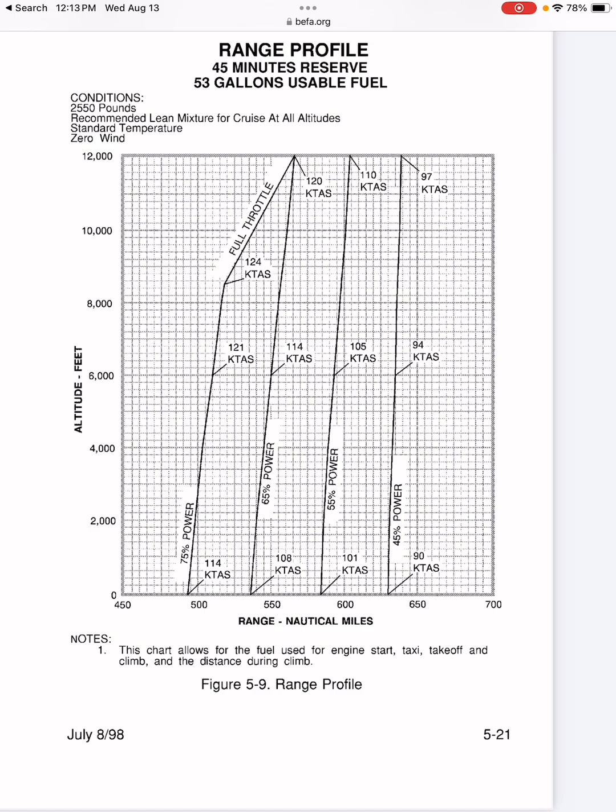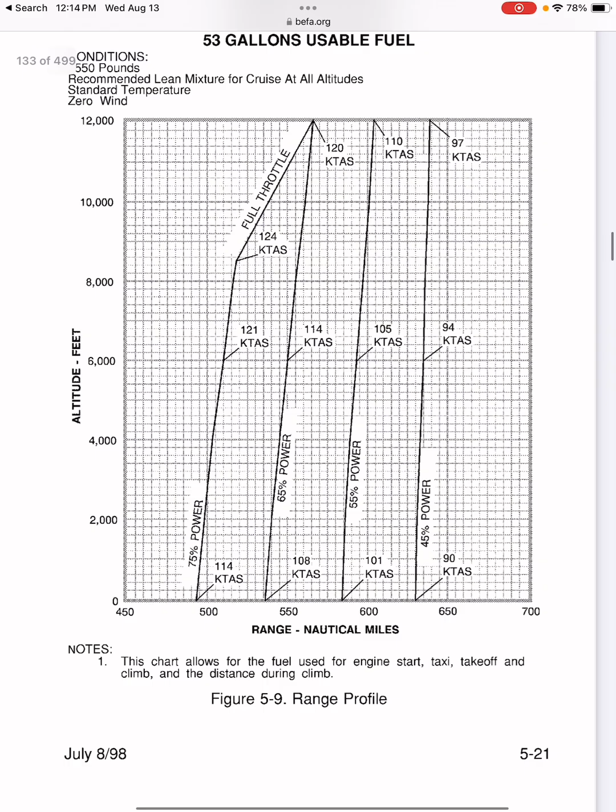This is assuming that we have 53 gallons of usable fuel with 45 minutes reserve. So if we just spent all the fuel out with 45 minutes of fuel left and we filled it up all the way to 53 gallons, because we know we have 56 gallons, we would get 550 nautical miles out of it. Just a heads up, nothing you ever want to do, but just showing you the performance of the aircraft. And then this is just the endurance, so we know we can go 550 nautical miles if we bled all the fuel out of the engine.

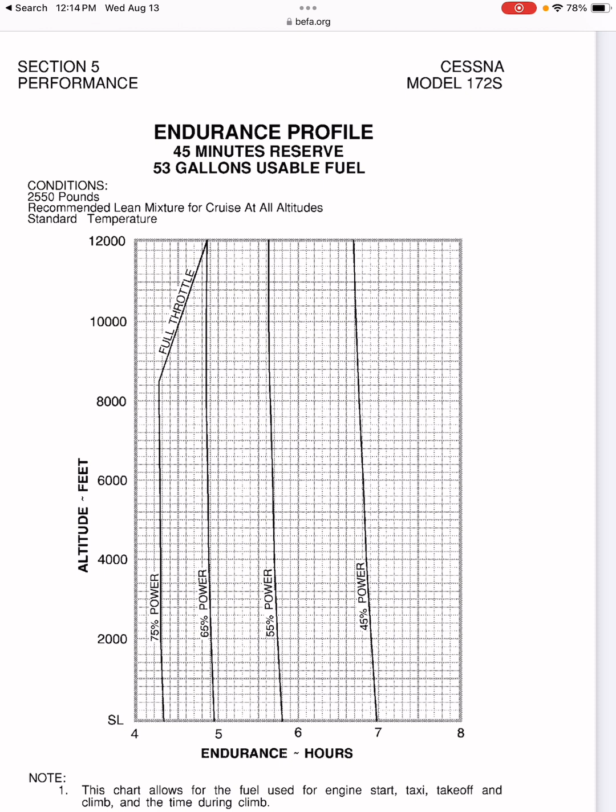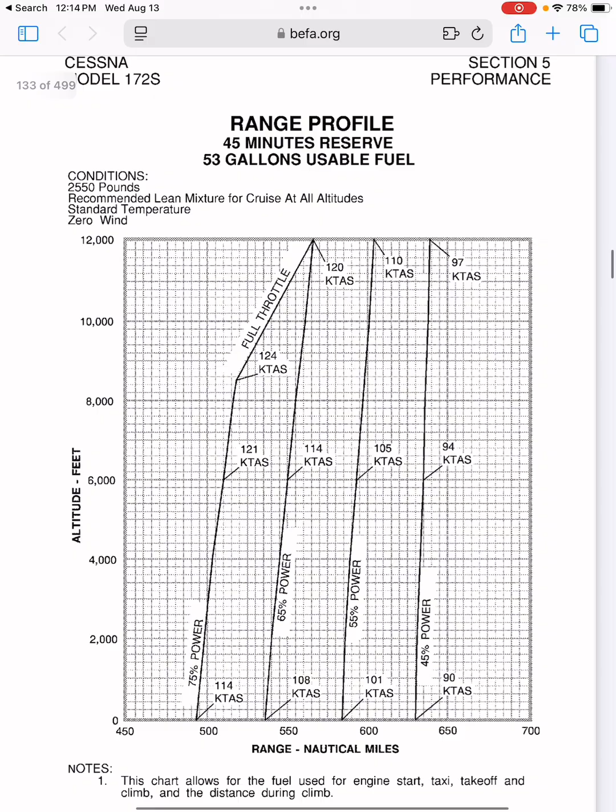Read the conditions though: 2,550 pounds, standard temperature. Honestly, these charts aren't super important, the range and the endurance. It is very important to understand how much fuel you're going to burn in gallons per hour, but we're never going to bleed it out with a 45-minute reserve. We can go ahead and calculate that without these charts.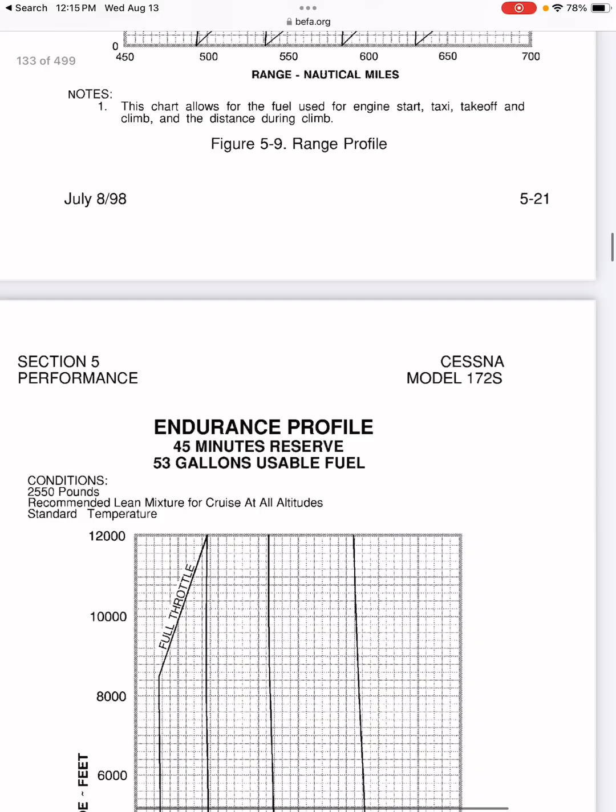So cool, and then we have to land. So we cruised, we took off, we got the climb rate, we know the fuel it took to climb, the nautical miles, how much time it was going to take. Then we got to cruise, we got our true airspeed, we understood our gallons per hour, how much fuel we're going to burn, and our brake horsepower. Now we got to land.

So we got to pick a runway that's going to allow for a ground roll. Let's say we're doing a flight out to Yuma. I can't think off the top of my head what the elevation is out there, I believe it's probably around 1,000 to 2,000 feet. But we'd have to calculate the pressure altitude to understand our ground roll there.

So this is short field landing distance at max gross weight. Our conditions are flaps 30 degrees, so full flaps. This is power off, maximum braking as soon as we get those wheels on the runway. Paved, level, dry runway, 0 wind. Headwind would decrease this, tailwind would increase this. Speed at 50-foot obstacle is 61 knots, so our approach speed is going to be 61 knots in this scenario.

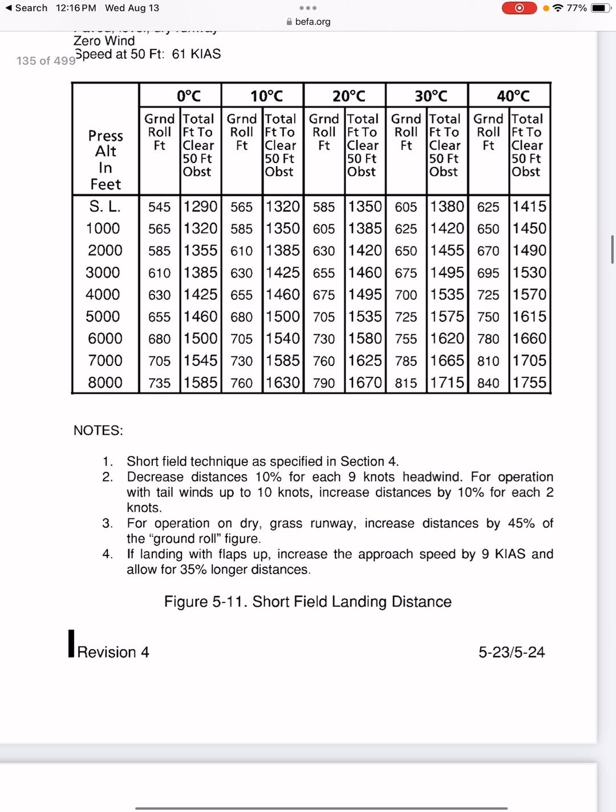Short field landing techniques, as specified in Section 4 of the notes, decrease distances 10% for each 9 knots of headwind for operations with tailwinds up to 10 knots, and increase distances by 10% for each 2 knots of tailwind. That's a lot. This is why we always land into headwinds and not tailwinds, because tailwinds start eating up a lot of runway.

For operation on dry grass runways, increase distances by 45% of the ground roll figure. That's a lot, 45% if you're landing on a grass runway, so you have to bump up that figure significantly.

And if landing with flaps up, increase the approach speed by 9 knots and allow for 35% longer distances. So if we had a flap failure and had to land flaps up, we'd have to increase our approach speed, which increases our landing distance by 35%, which is huge.

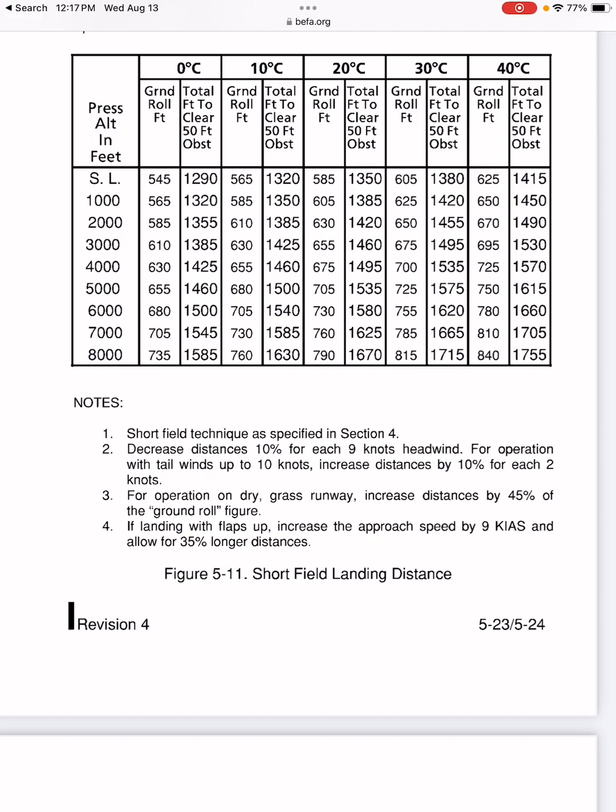Now let's calculate the pressure altitude at our landing airport. In the scenario we didn't do that, so we'll assume it's also 1,000 feet. Pressure isn't going to really change much; the big thing is temperature. We need to know the pressure and the temperature to use these charts. We'll assume it's a bit warmer and humid today, say 30 degrees Celsius, and use the 1,000-foot pressure altitude mark.

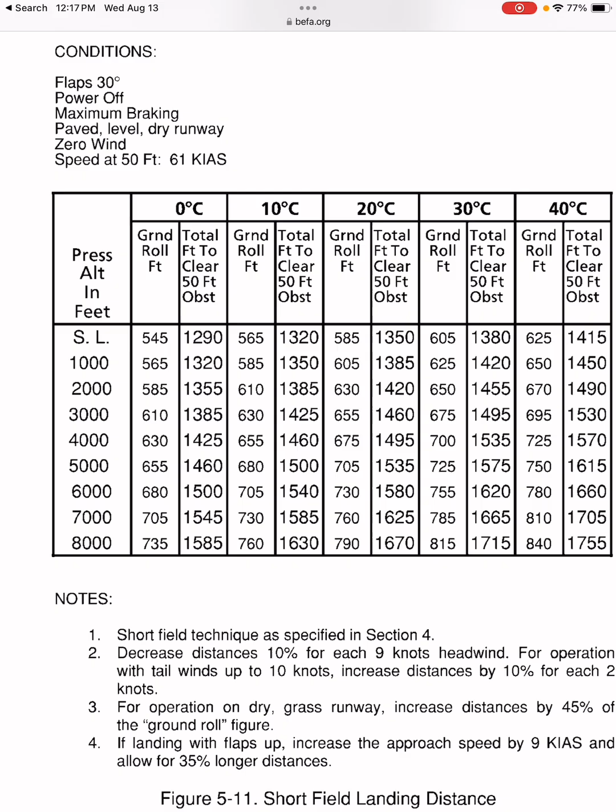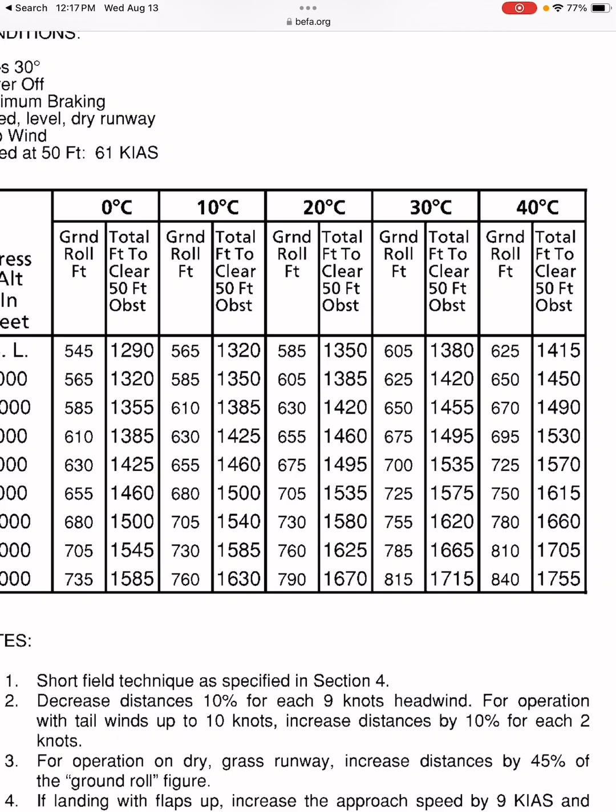We'll read it like we did for the short field takeoff, going from 1,000 feet pressure altitude to 30 degrees Celsius. Our ground roll is going to be 625 feet. Total feet to clear the 50-foot obstacle is 1,420 feet, but the big number here is our ground roll, 625 feet. We need a runway that allows for that, which most runways do.

But this is assuming a zero-wind situation. If we had a tailwind, we'd have to increase this. If we had a grass runway, we'd have to increase this by a lot.

If the pressure altitude was 8,000 feet and temperature was 40 degrees Celsius, the ground roll would go to 840 feet. The biggest factors are: are we landing in a headwind or tailwind, is this a dry grass runway, are we flaps up, and what is our approach speed? Because once we bring up the approach speed from 61 knots, flying anything faster drastically increases ground roll, and that's where runway excursions happen.

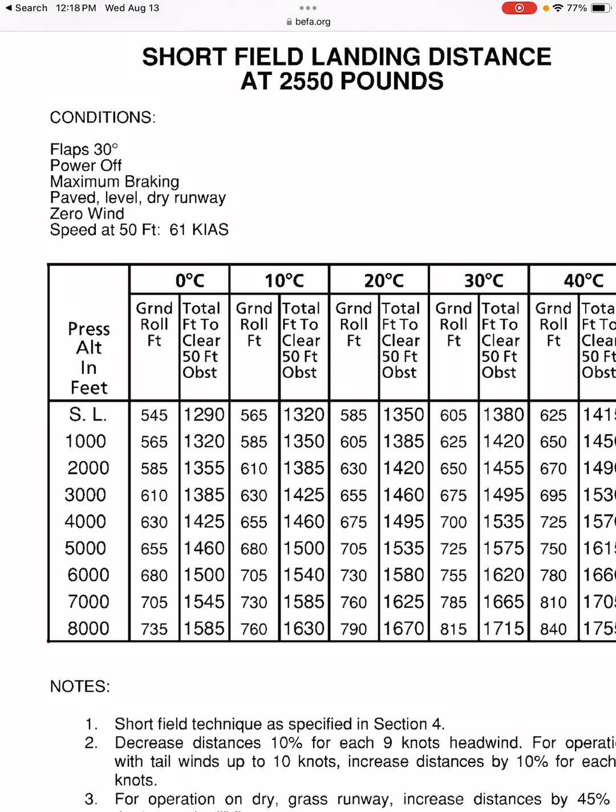Those are situations where people run out of runway and go into fences, trees, obstacles, cars, other people. This is a huge reason why we use these charts, to keep us and our passengers safe.

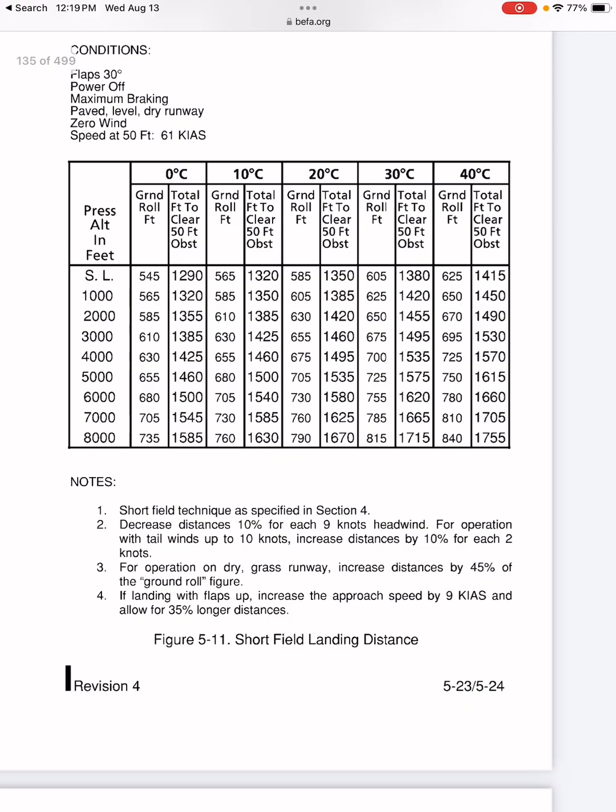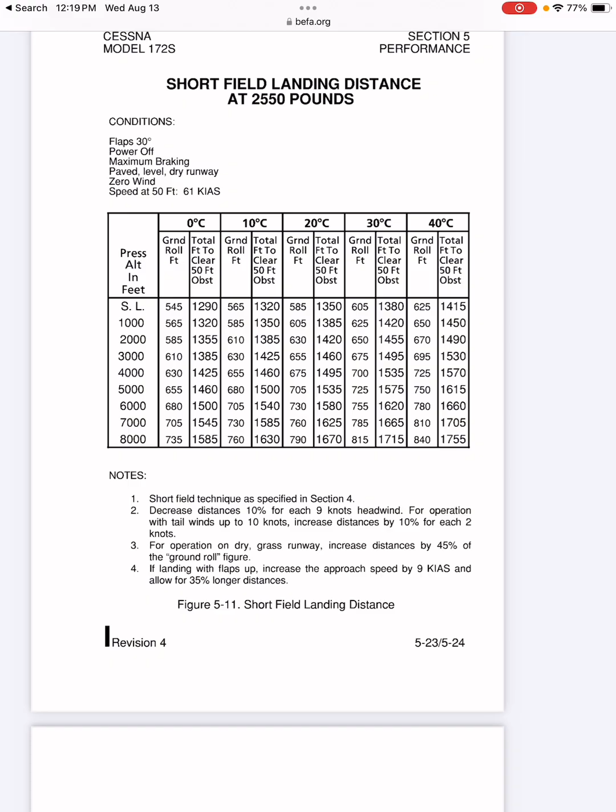This is part of our 91-103 pre-flight action requirement, to understand these charts, our pressure altitudes for departure and arrival airports, the density altitude, the temperature at those airports, and what kind of performance we're actually going to get. If we go through that POH chart for takeoff and landing distance data, we have to understand it.

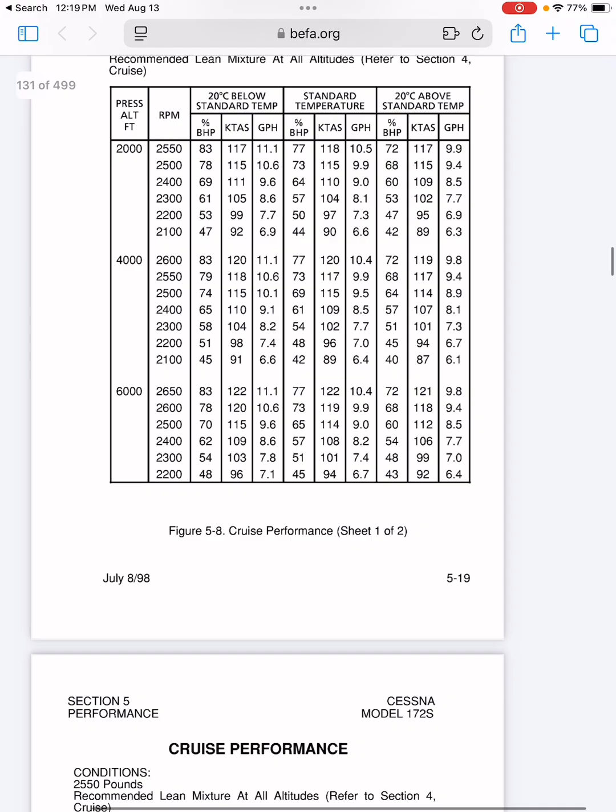We also have to understand that for a given day, our cruise performance is going to change. We're burning more fuel or less fuel, going faster or slower, and that drastically affects how we plan the flight, how much fuel we bring, and how much time we think it will take to get there.

So that's going to be Chapter 5, the Pilot Information Manual. This was just a brief overview of it. Go ahead and do some sample problems, jump through it. This will 110% come up on your check ride.

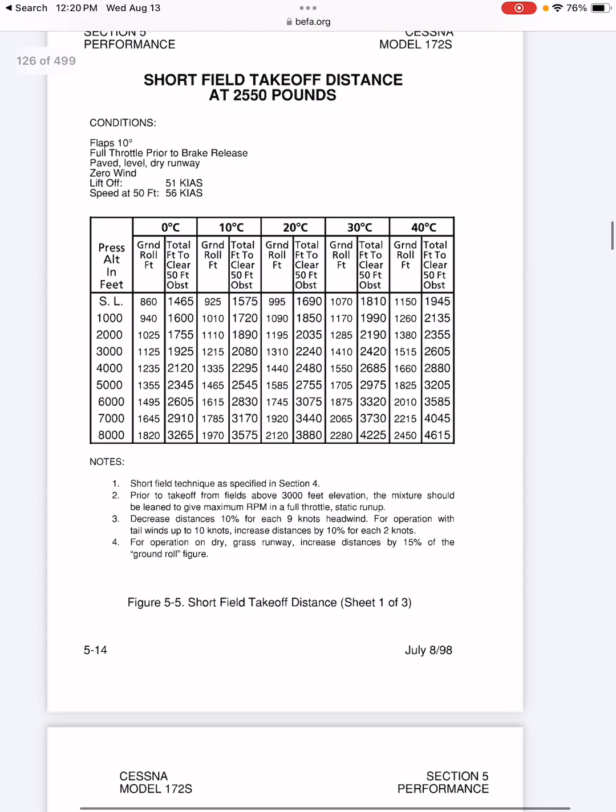It will ask you how to use these tables, give you a scenario with pressure, altitude, and temperature, and have you calculate the ground roll for a takeoff or landing. What's your cruise performance going to be? What do all those condition notes mean? Just go through it and become very familiar with it, because it might save your life one day.

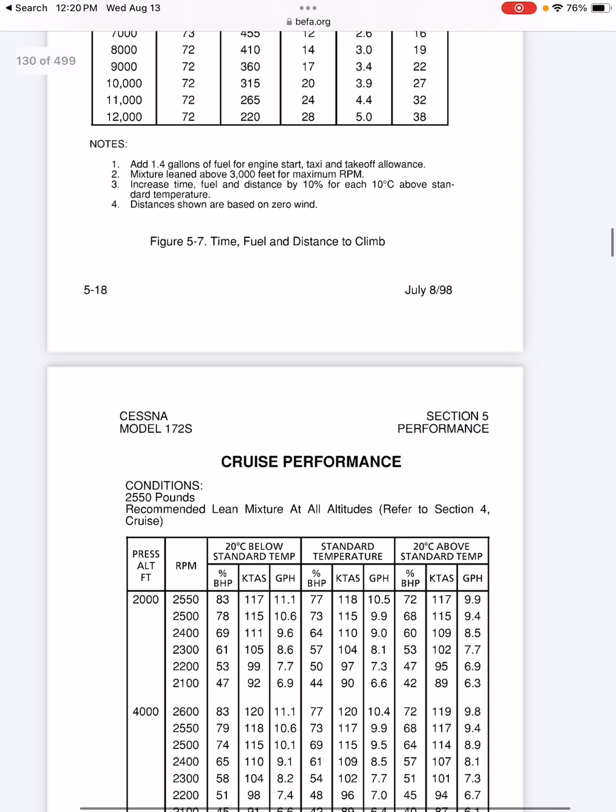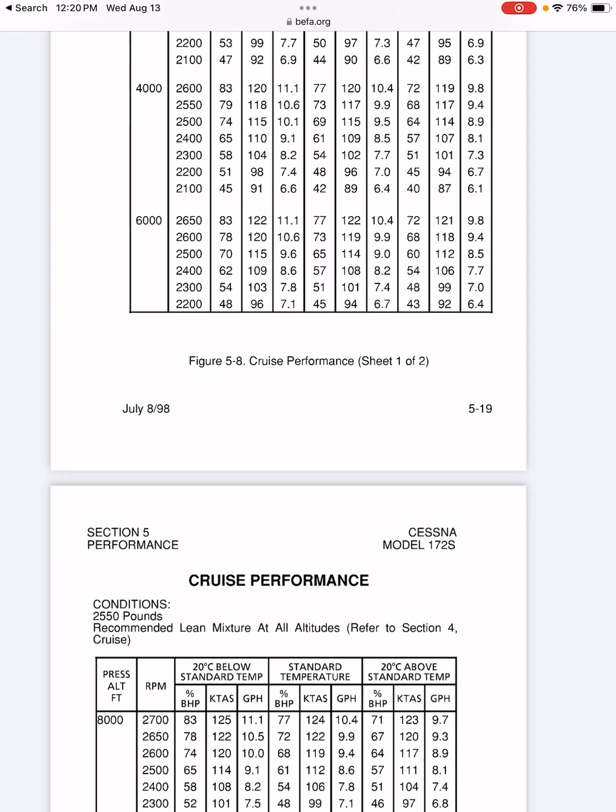But yeah, that's going to be performance. We'll go into limitations in the next video, covering weight and balance, how we distribute weight in the aircraft, how that affects our stall speed, and how important it is to stay within the center of gravity envelope. That's going to be the gist of the next lesson. But that's performance. Thanks.